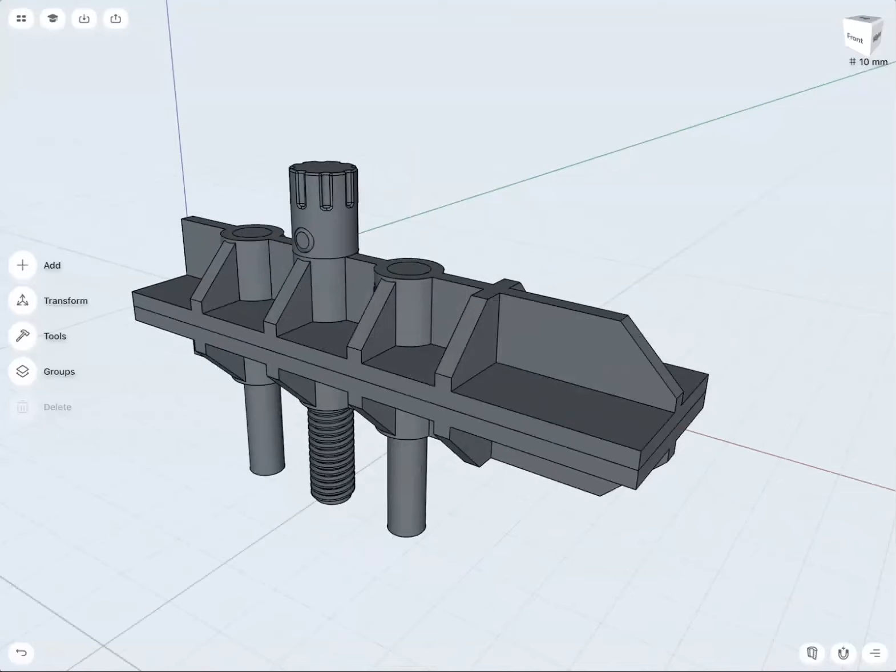Hello, everybody. In today's episode, I will show you how we can use Shapr3D and the sketching and modeling tools to create your own custom 3D printed model making clamp. As Anna mentioned, I'm an industrial designer, and as industrial designer, we have to make a lot of models. Sometimes for a wood shop or model making shop, now with 3D printing, we can create our own tools, which is really great.

What I will show you today is how we can structure our design into all these individual parts, how we create all the individual sketches and why I create them in a particular order. After modeling the part, I will show you how we can structure everything for 3D printing, so when we bring it to Cura or your other favorite 3D printing software, you can easily and efficiently print your own parts.

So with that said, let's start with a new scene. One of my first steps is to go to the view cube, upper right corner, tap it, go to units. I work in millimeters and decimal for degrees. We can go to views and select top view.

Before I continue, let's go to the bottom part where you see the magnet icon, bottom right, select it. I would like to have snapping sketch to grid and auto constraint turned on. Working with the grid is very useful to make sure that everything is perfectly lined up, and I can position and align all my parts very easily.

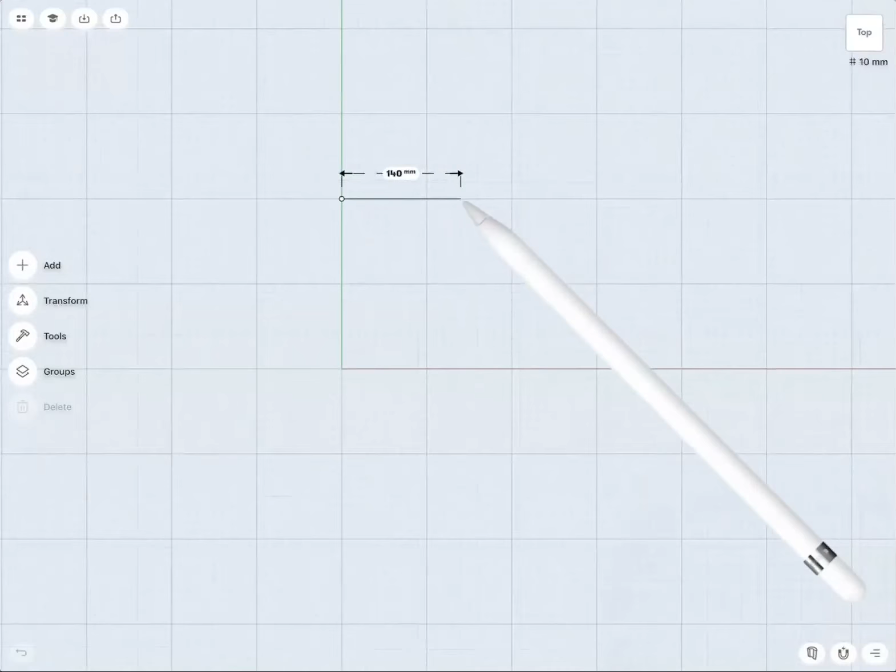We can zoom out a little bit with pinching our fingers. The wood clamp is 40 millimeters deep and 140 millimeters wide. So with the pencil, I start drawing a line. I can see already I zoomed out a little bit too much. Not a big deal, I can zoom in a little bit, select the point, and bring this one down.

The whole clamp is 40 millimeters deep, so with the pencil on the right side, I draw a line 40 millimeters. With the auto constraint turned on, I have all these constraints automatically added to me, which is a really great helper so I don't have to do this by hand. I can also draw another line horizontal to there.

Before I continue, let's add some dimensions. With the pencil, I select the line, then I select with the pencil the number and simply click OK. That specifies this line to be 140 millimeters. I will do the same with the vertical line.

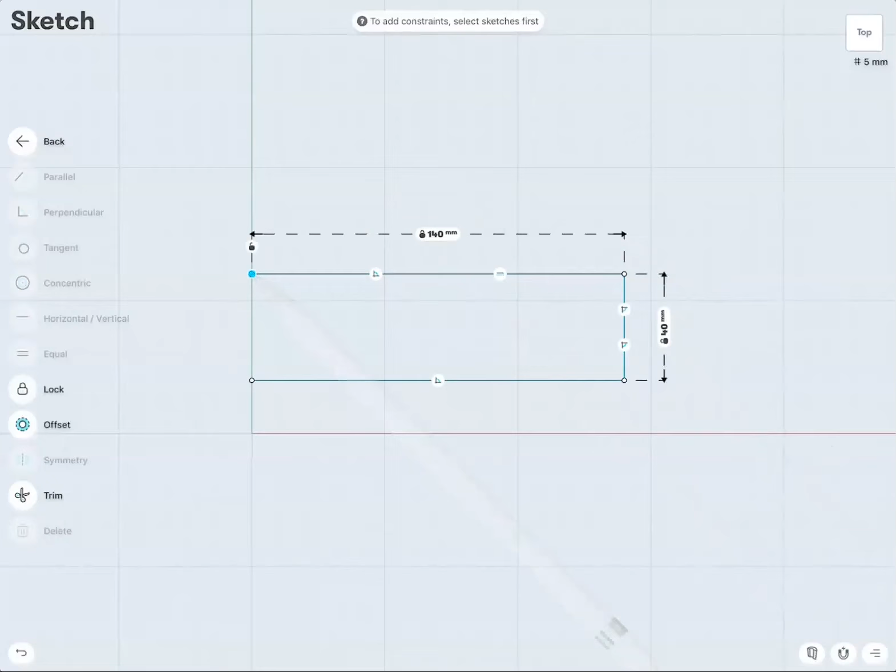Now to work easier, I have to position and center the sketch on my grid. To do this, there's a very simple step. I select one point and move this one down, a little bit to there. I moved it on purpose a little bit lower. On the right side, I have just one line with 40 millimeters.

Check out what I'm doing now. I draw one line vertical and another line vertical. Now I have two lines. This point, which I have selected, is already at the center, the connection of y and x. That's the 0 point, and I want this point to remain there forever.

So with the pencil, I select the lock icon. When you do this, that point becomes pure black. If I select it, I can't move it anymore. So this point doesn't move.

Now I can select one edge, doesn't matter which one, select the distance and say 20, and this one automatically is 20. I don't have to add that dimension there, but this way, very easily, I have actually created the base square and positioned it correctly.

For the wood clamp or the model clamp to be structurally more secure, I need to add some support, and that is what I will do in the next step.

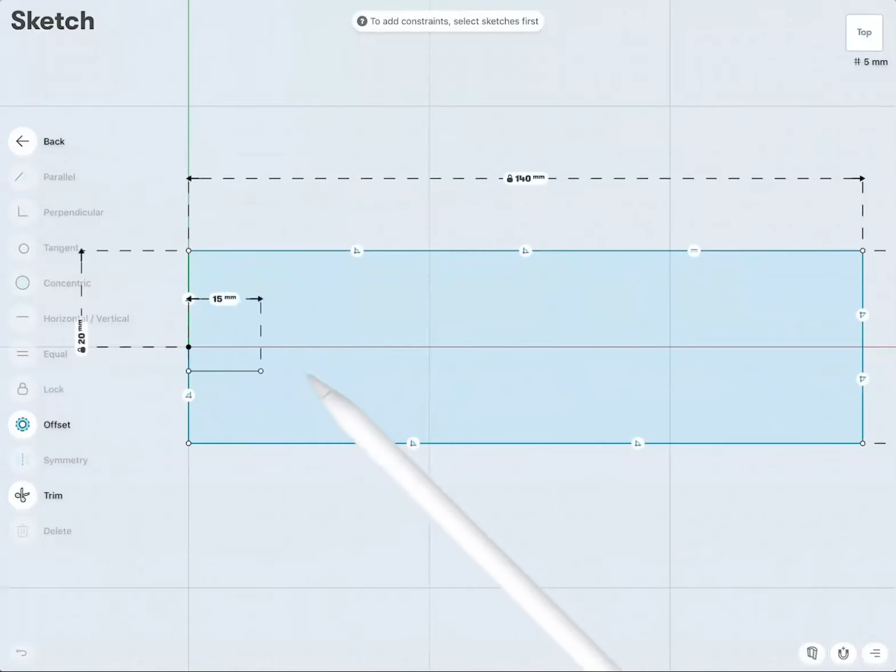So I will do the same here, one line and another line, left to right. This line I will select to make sure this is horizontal. And on the left side here, I select this one and maybe say 2.5 millimeters, because I want 5 millimeters to be the material thickness.

But if you also work with millimeters and 3D printing, working with 0.5 millimeter is not necessarily always necessary, so maybe it's also easier to just break it down to even millimeters. On the right side, I will select these 2 points and specify this to be 4 millimeters. And you see automatically the lower line, this one was moved up. Great.

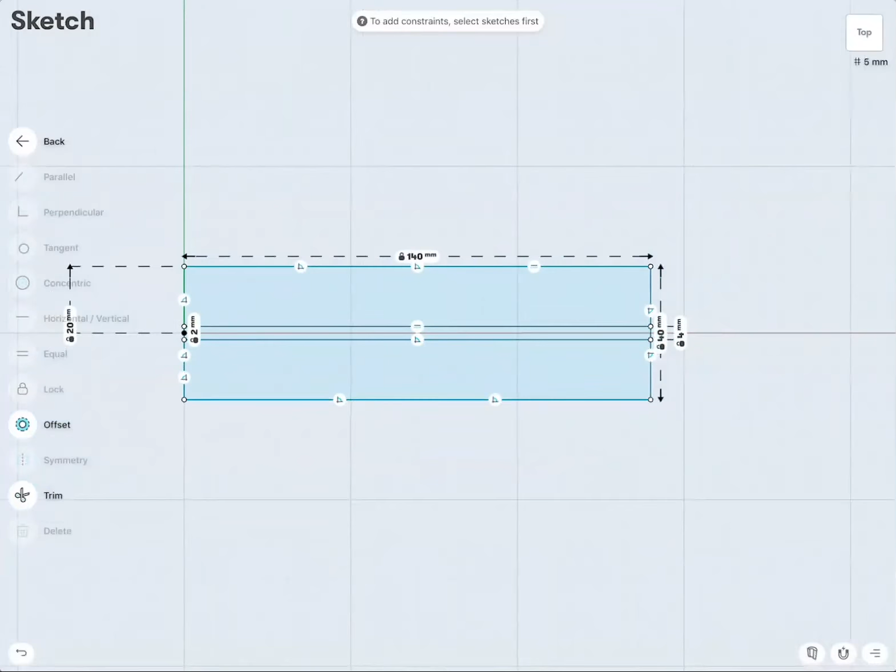So this surface, which I just created, later will be the vertical support extrusion. For the clamp to open and close, I need to have 1, ideally 2, 3 is best, support axes - 1 axis with the threading and 2 axes to glide along. And also these cylinders, which later we will create, I want to have some support structure.

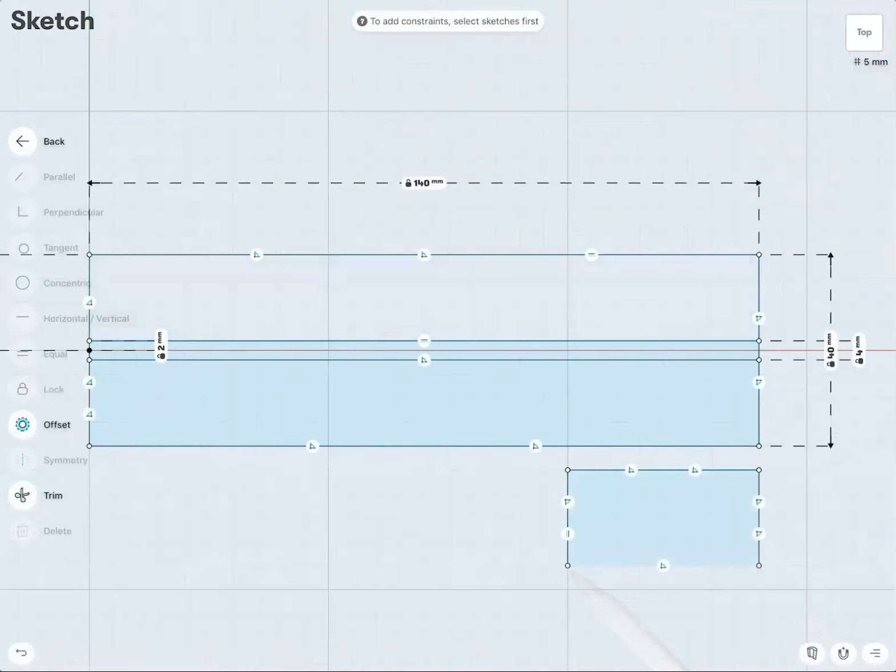So working with the grid again is very useful. Let's draw a rectangle here - this is just a visual guide. This helps me identify where roughly I would like the model part to be, and then I will work with the grid.

For example, here at the center, here at the center, and here at the center, I draw lines. The reason why I drew these 3 lines is it helps me plan out where I would like to position the cylinders. With the pencil, I start drawing and make a circle, and just reposition it. See, again, I use the grid for everything.

The radius should be 10 there and there. Okay, good. So that's roughly how much space actually later everything will occupy.

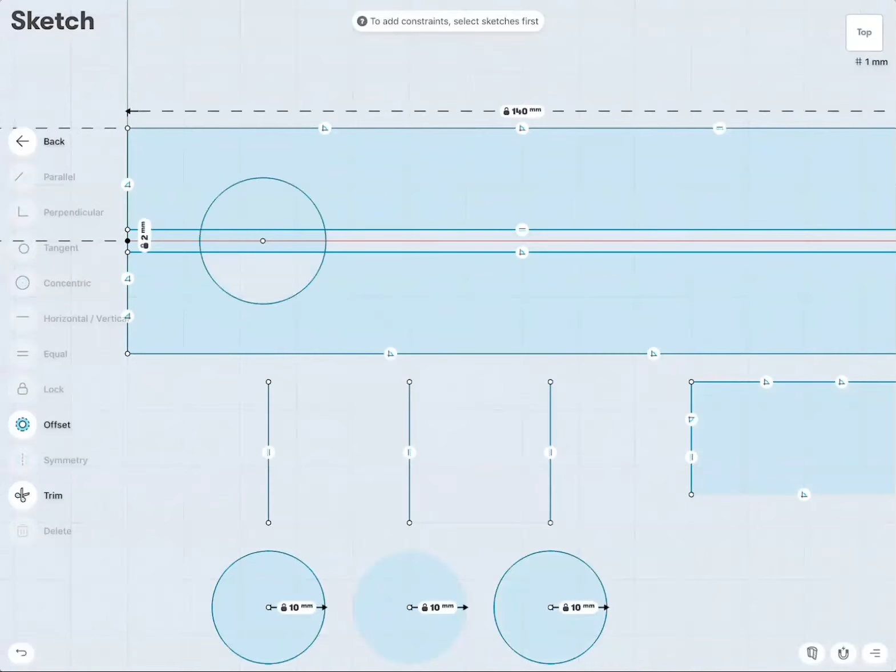This might look a little bit complicated at the beginning. You might ask yourself, why do I draw the cylinders down here and not up here? The main reason is I make everything a little bit easier to structure by not loading my sketch too much. The cylinders I have here later, I will create actually in a different view for a Revolve object. This will all make a little bit more sense when we progress.

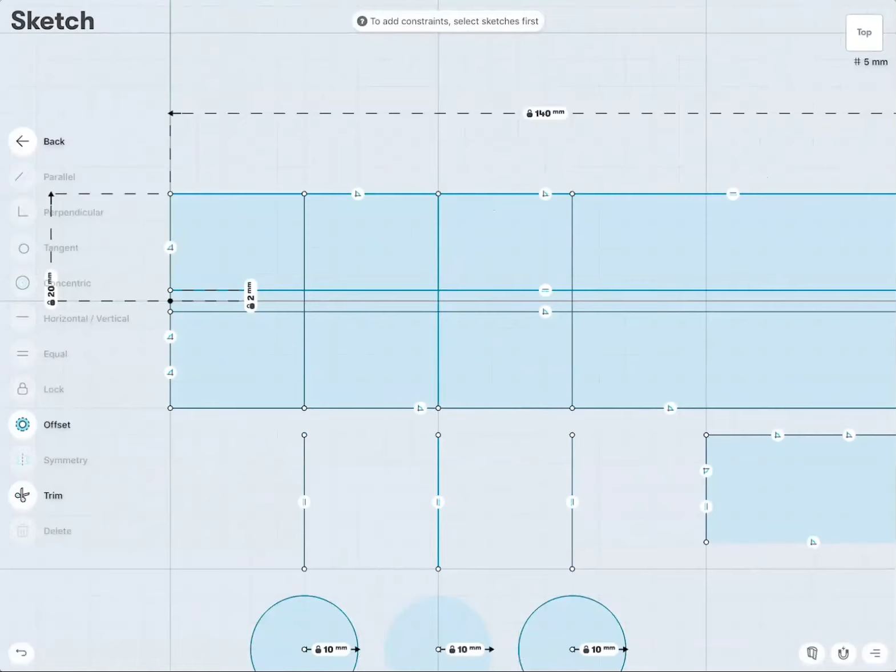With these lines drawn, I already know that roughly here is the center of the 3 other support areas I would like to extrude up. And from each of these lines to the left and to the right, I would like to have another line with 2 millimeters. So we can zoom in a little bit, draw a line.

And you see this is 4 millimeters, so I have to move this one a little bit to the right. And then I draw another line here. I draw a line there - this is 1 millimeter over. Let's make this vertical.

So when you move a point and the line starts to rotate, we need to add a vertical constraint if you do not want that line to rotate. And there's the last one.

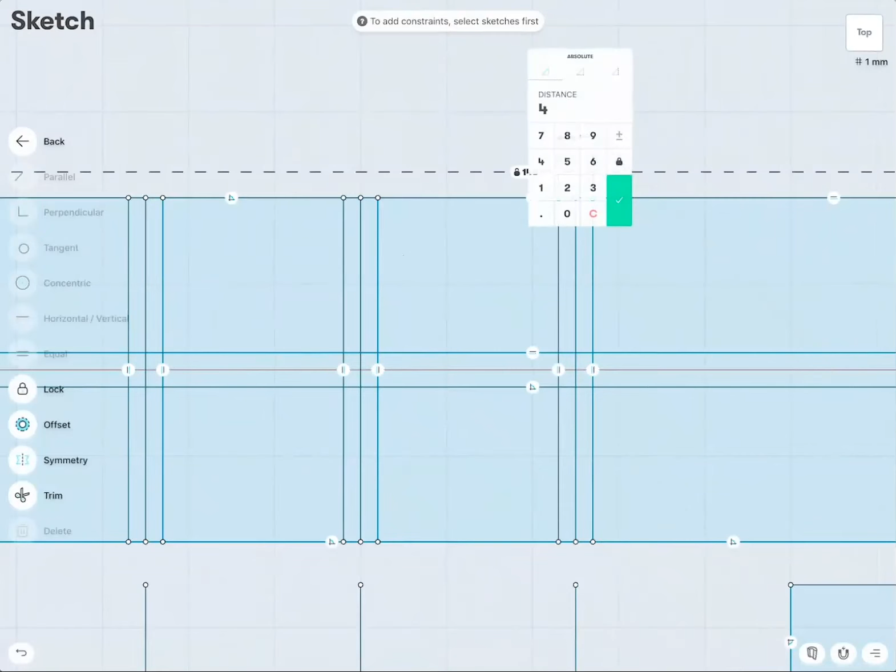So if we select these 2 points, we could specify everything of being 4 millimeters. There, and the last one.

These 3 center lines which I have there were more of a helper, so now I can select them and remove them. All this here I will remove too - these were more some helping elements. There, deselect this one and delete. Good, good.

Okay, so at this point, when it comes to the top view, we have most of our stuff already created, and we can go ahead to extrude everything up. I would like the clamp to be lightweight and very easy to use, and not having any sharp corners.

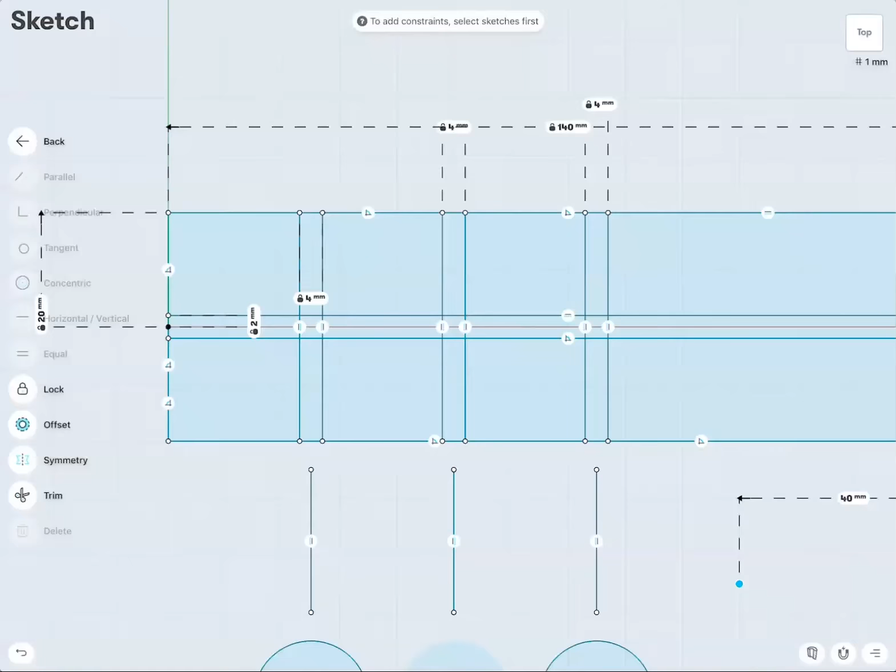So I can select all these faces, and then with the pencil, push up and extrude this one to 4 millimeters material thickness. Then in the second step, I select all these other faces, and with the pencil, move upwards and extrude this one to 20 millimeters height.

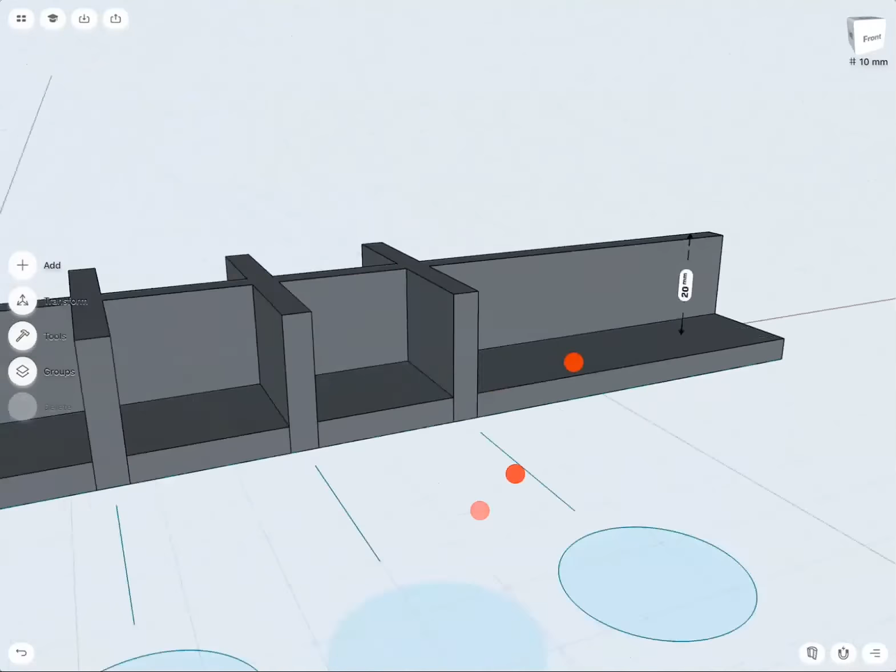So everything has now 4 millimeter material thickness. These are all individual elements, as you can see - if you double click on a face, these are not joined together.

So let's join those. To do this, let's go to Tools, then Union, select all the elements with the pencil, and select Done. If we rotate now, there you see these are unified solid faces now - these are not individual elements anymore. Great.

Also here, the circle we can remove - we don't need this necessarily anymore. So sometimes I also clean up my drawings and only have inside the sketch what I really need.

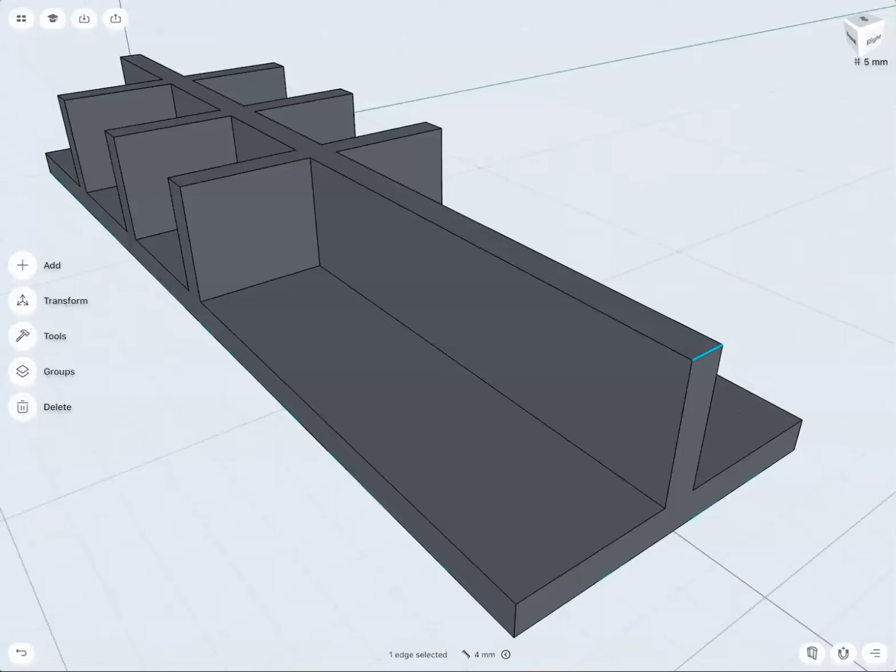If we rotate this around a little bit, this looks a little bit sharp, so let's chamfer actually all these edges. To do this, I will select this edge, swipe left or right to go into fillet or chamfer mode, and I can specify the distance 12 millimeters.

Now I will repeat this with all these other edges. So be careful that you just select only the edges and do not click on the face, like what I did one time, because then you select all the edges.

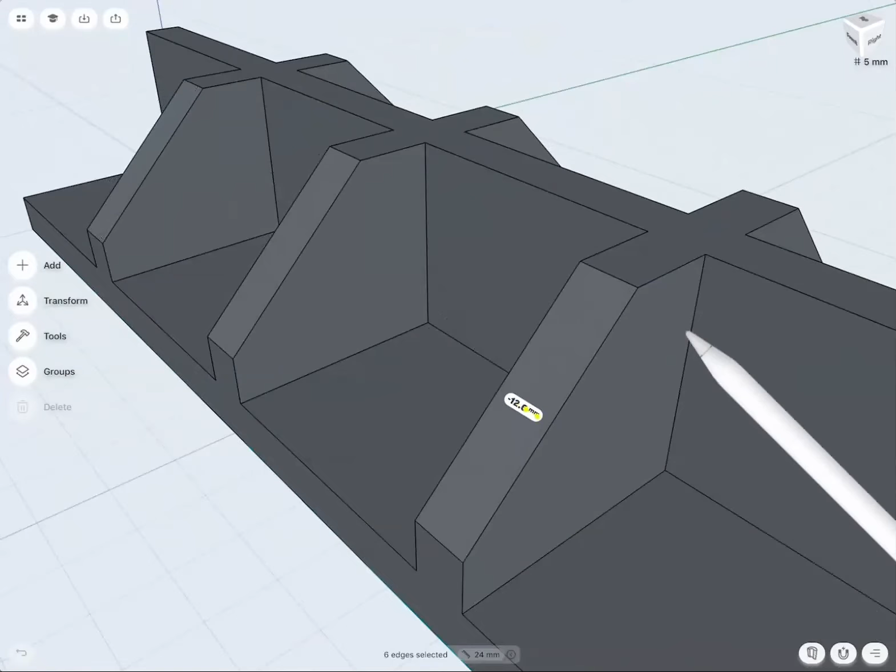With these 6 edges selected, I can now with the pencil swipe so I get into the chamfer mode, and 12 millimeters. Okay, so you see this already feels lighter. Structurally it has the same integrity, and we have removed all the sharp edges, which could make this tool a little bit difficult to work with.

So before I continue, let's go to groups, swipe to the left, rename, and let's call this one top. I click plus, make a new group, swipe, rename - I call this one bottom. How you give these groups names is really up to you; you can develop your own syntax.

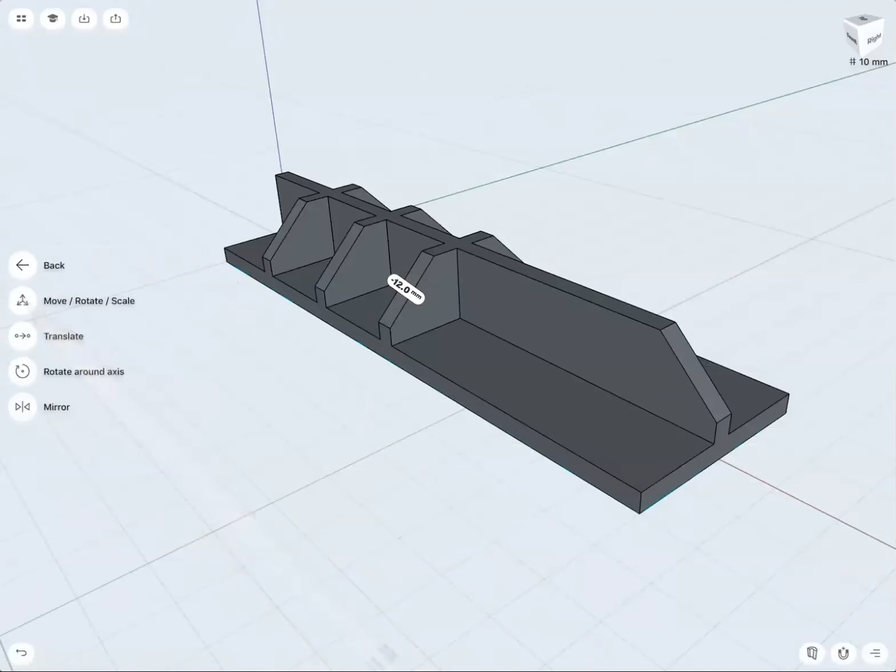And I would like to make a copy of this part and then flip it down. To do this, I have bottom activated. Then I will go to transform, mirror, double tap on the face to select the complete body, tap next, and then I select the bottom face. And I want to have copy turned on. And you see with copy turned on, it leaves the original part and makes a mirrored copy. Tap done.

And we have to move this one to the bottom part. So with bottom selected, select the move to group icon, select the object, select done. And there we are. For the moment, we can actually hide this one. We don't need it. Good.

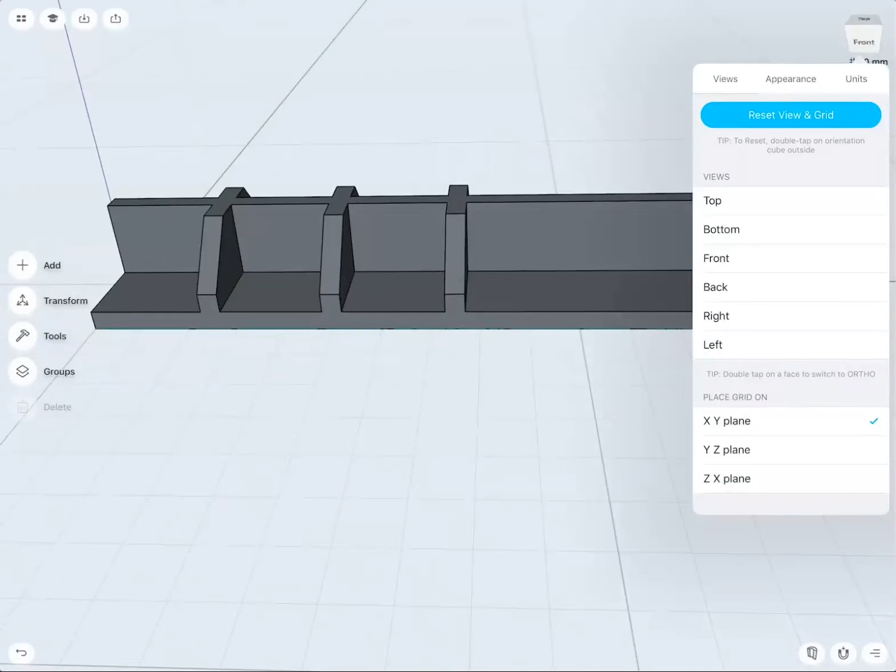With this part done, we can actually now switch to working on the axes and the cylinders and the threading. And for this, we will go to the front view. So I will go to the view cube and then select front. I will not, for example, tap a face, because while I go to a side view, you see this will move me onto a grid that is aligned with this face, and that's not centered on this face, which is why it's very important that if you want to work symmetrically, you use the views from the view cube.

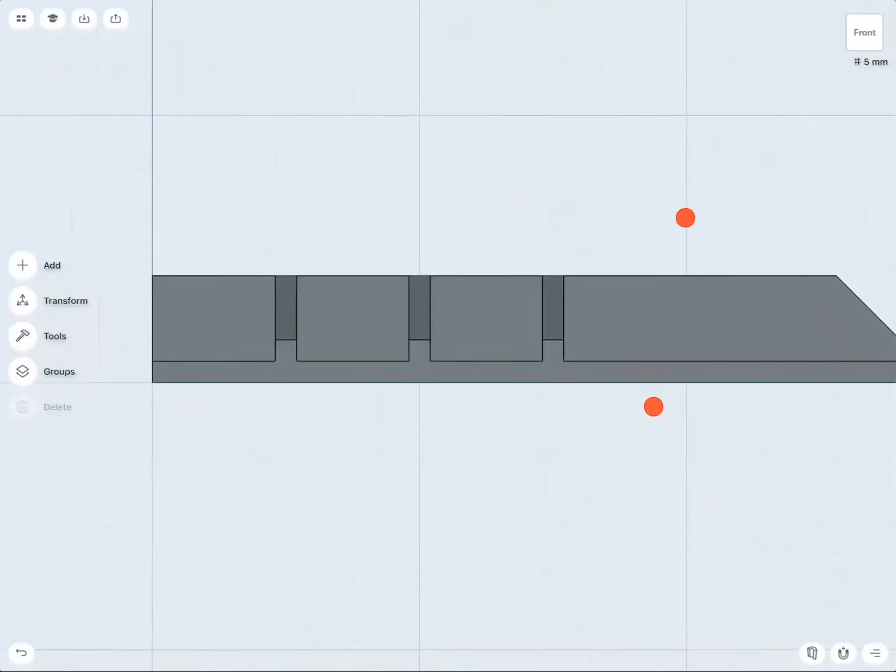If I rotate the view now, you see this is perfectly centered. Good. Let's go to the side and zoom in a little bit. And again, because I work with the grid, I zoom out just a little bit till here. Now I can draw myself again just some guidelines. And these guidelines are perfectly centered on each of these three faces, which means now I can turn even the bodies off, go to groups.

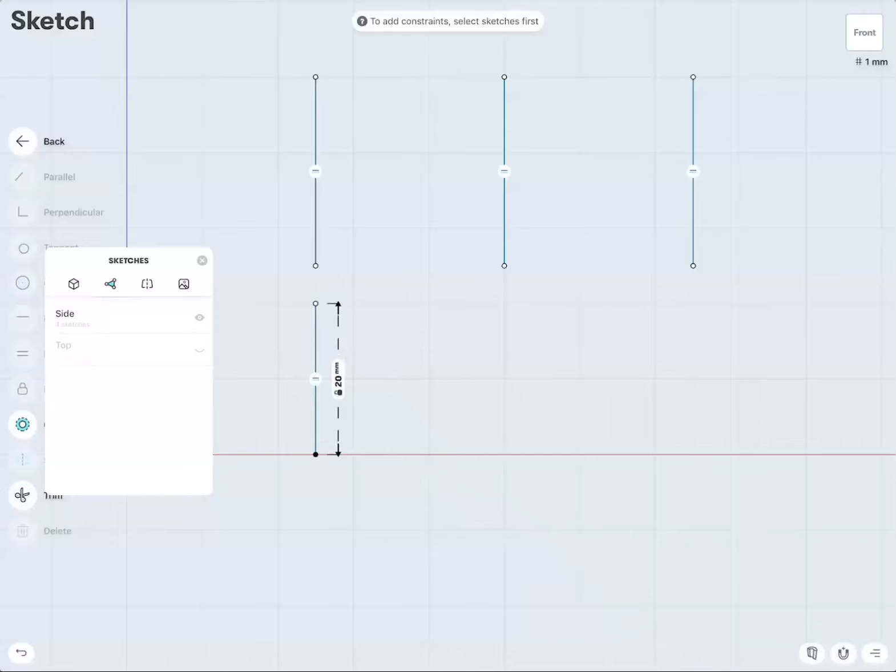Let's call this group top, and this group I will call side. I also turn off the top group, so I do not mess with it. And I will draw a line below there, select the lower point and lock it. This line is also vertical. And now select a line and add 20 millimeters, because this, you will see, is exactly the height.

I will do the same here. Lock it and 20. And here. Again, this is a perfect example why working with the grid is so useful. And once that is done, we can select these three lines and delete them.

So let's assume you do first a prototype 3D print. That means your axes are made out of plastic and not steel. And 3D printed parts are a little bit less stable. They can bend a little bit more than, for example, steel rod or steel threading you can buy at every hardware store. That means we, for 3D printing purposes, have to make support structures like cylinders a little bit thicker.

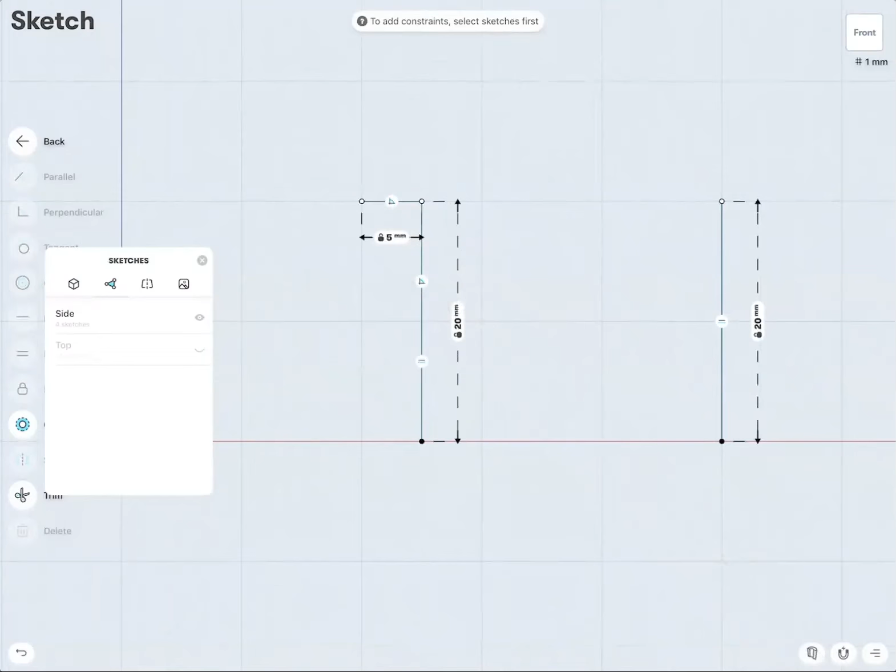These lines are the revolve axes. And I will create the profiles to revolve around consistently on the left side. And I would like each axis to be 1 centimeter thick. So I will draw from the top one line, make this 5 millimeters. Then I draw a line down and a line to the right. And this line I will make horizontal. So this is, for example, half of the rod thickness.

And the rod has to slide inside a cylinder. And I will decide 3 millimeters for the material thickness. So I will do exactly the same, but just with 3 millimeters material thickness. Add the constraints, and there we're good. And we can continue this with all.

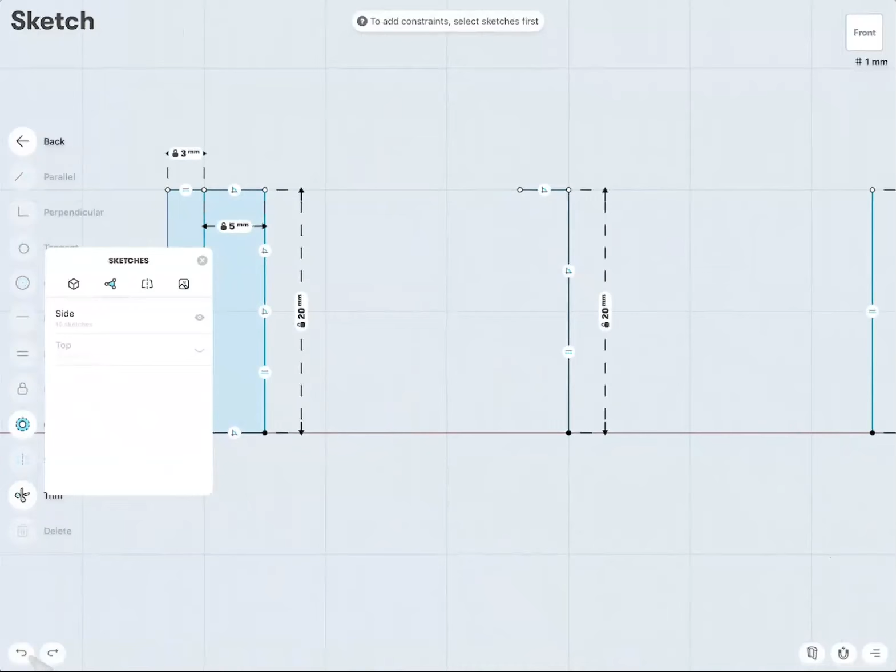If I already know 5 and 3, I could maybe draw the first line, instead of being 5, already 8, and then draw a line in between. But out of personal preference, I always like to rather draw individual elements. So if I have to modify them, it's a little bit easier to manage. And the missing constraints. There we are. And let's do the same here. So you see, this is pretty quick to do.

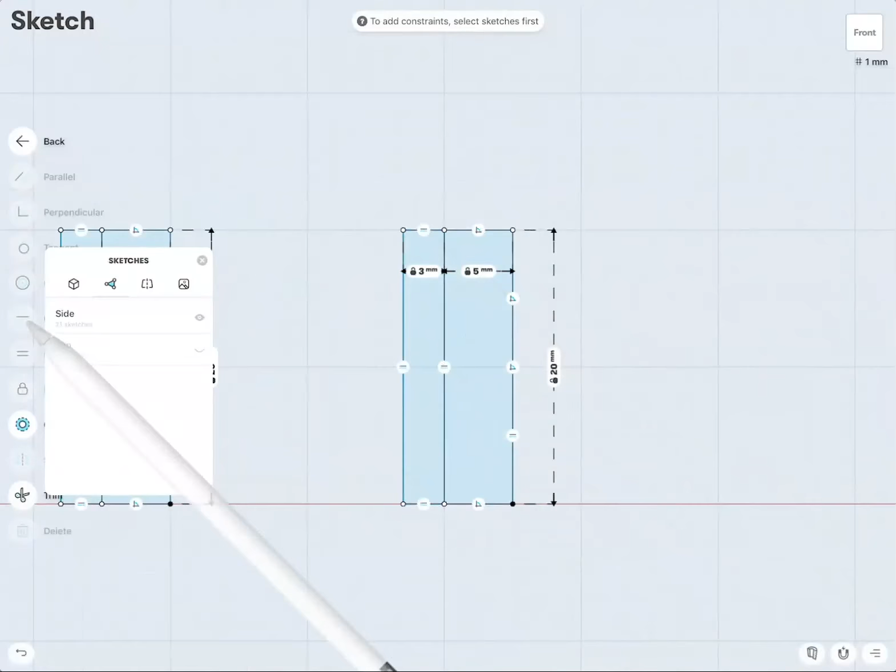Also, as a small tip, if you want to build a tool, try to go to a hardware store or somewhere and take measurements. It really helps getting a feeling for how thick something has to be, how wide, how long. Because nothing is more frustrating than when you create everything and then later it doesn't really work because you overlooked something.

If I go to the groups again and show the top, all the parts I built are from the bottom till the top part. But I also need to have an extension to the bottom. And by my measurements, I figured out 50 millimeters for me is actually a good distance. So 50 millimeters. Then I draw another line, connect these, specify those to be horizontal and vertical.

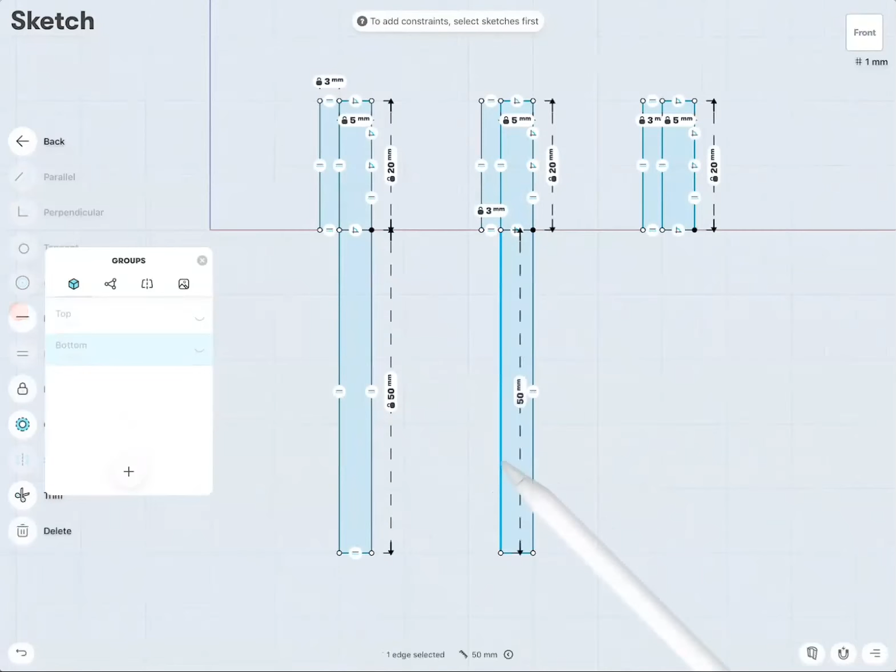I skip actually adding the 50 millimeter in the last two. I could do it, but because I work with the grid and the far left one is 50 millimeters, I know that these all are 50 millimeters. Good. So we have the left support, the right support, and then the center. That's going to be the axis which will have the threading.

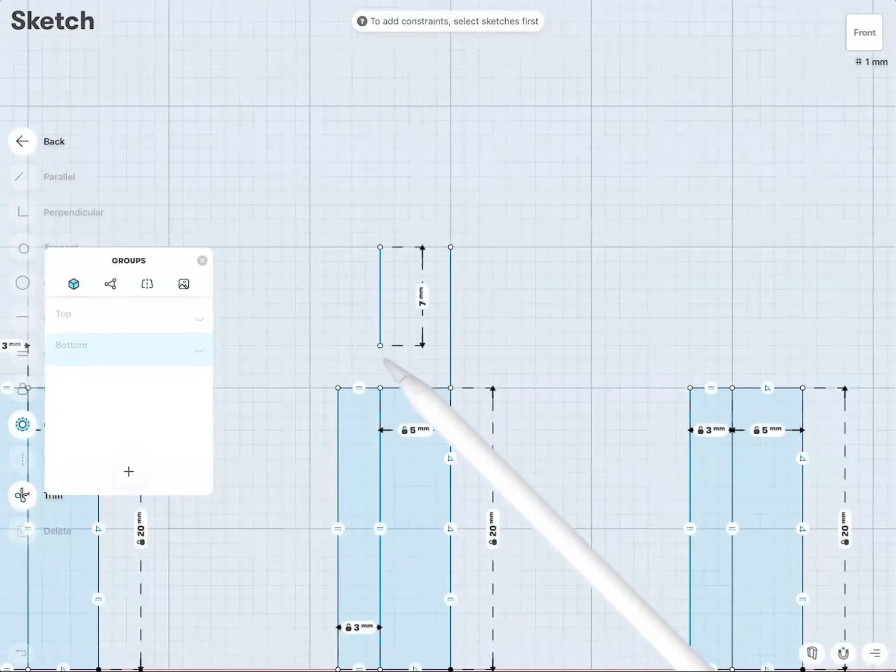And for the top, we also need to have a little bit of some sort of a grip. And the dimensions there again are up to you to decide what feels comfortable. How big do you want to make it? How small do you want to make it? So I decided to start maybe with 7 millimeters to try out. And then I draw another line there to there and another line there to there.

And what I did in this case is, you see here, I have 3 faces that later will revolve together, just be the rod. And this will be the cap. And again, that will be the cylinder that will support the part. Good. So having talked about the revolve, let's do that. I will make a new group. Call this axis. It is selected.

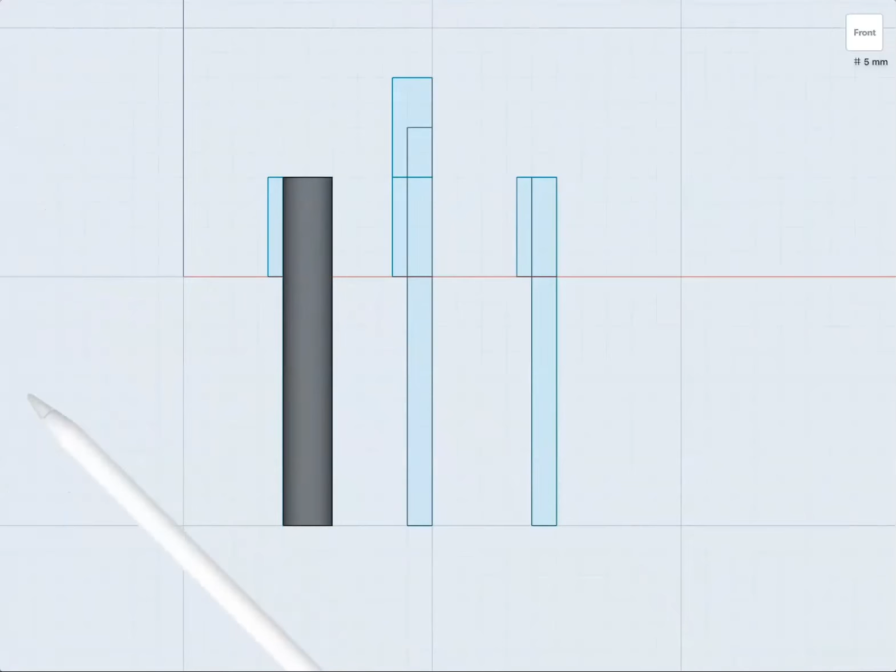Go to Tools, go to Revolve, and select these 2 faces. Next, select that edge. Go to Tools again, and Revolve. Select these 2. Select the axis. You see how that works? Pretty good. And unfortunately now, I realized I can't really see the sketch anymore. So I click Cancel for the moment.

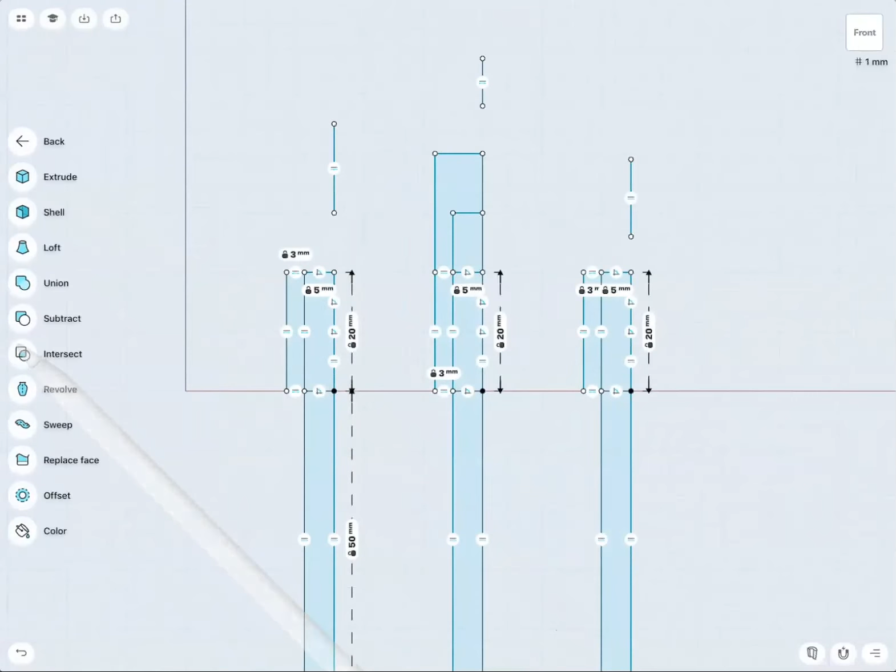And I could go to Groups and hide it. Alternatively, for this task, I can also put down a small helper line, again, using the grid to make all this a little bit easier to select. So revolve this one along this one, and Tools, revolve this along that line. Tools, revolve these 2 along this line, and 2 more times this along there, and this face, the cap, along this line.

Great. And in case I need to do something again for that purpose, I just leave these 3 lines which I drew there. With these lines done now, I could go to top and add these 3 first cylinders that actually will hold the axis to that part. But I also need to add these to the bottom part.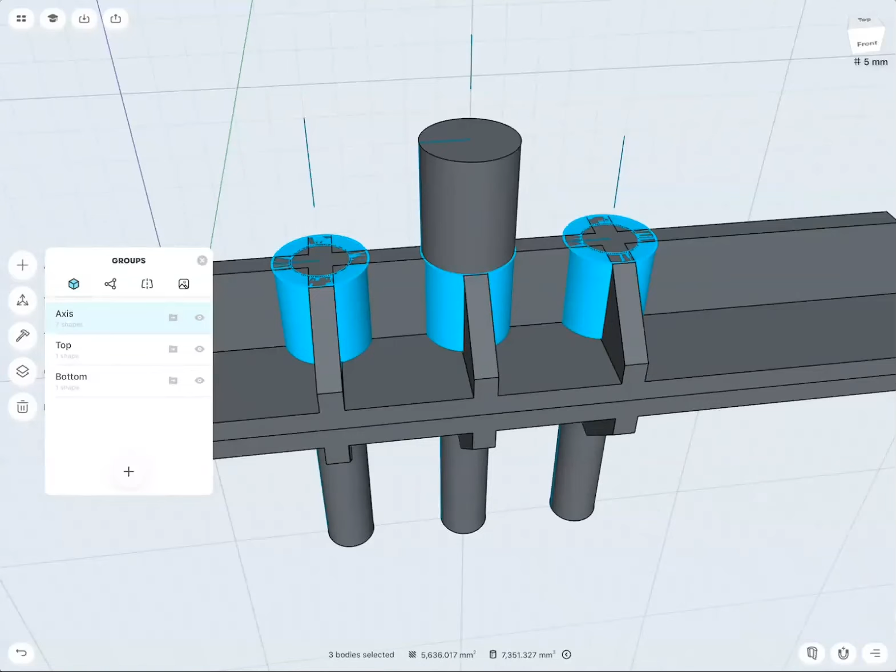So there are now 2 ways how to do this. Either I make 3 copies of those and then mirror them down to the bottom group, or I simply continue working on the top part and then delete the bottom part and just mirror again the top part. And maybe that is what I do. This will be a little bit easier. There are always many ways how you could do something. So try always to also establish a workflow that is as productive and easy as possible.

And via the union command, we join all these parts together. Select Done. And those 3, sorry, this one I will select and delete, because we will remove it later. And it can happen, as you can see, based on how you join parts, that an object might move. So go to top and add this body to the top group, so I can hide this.

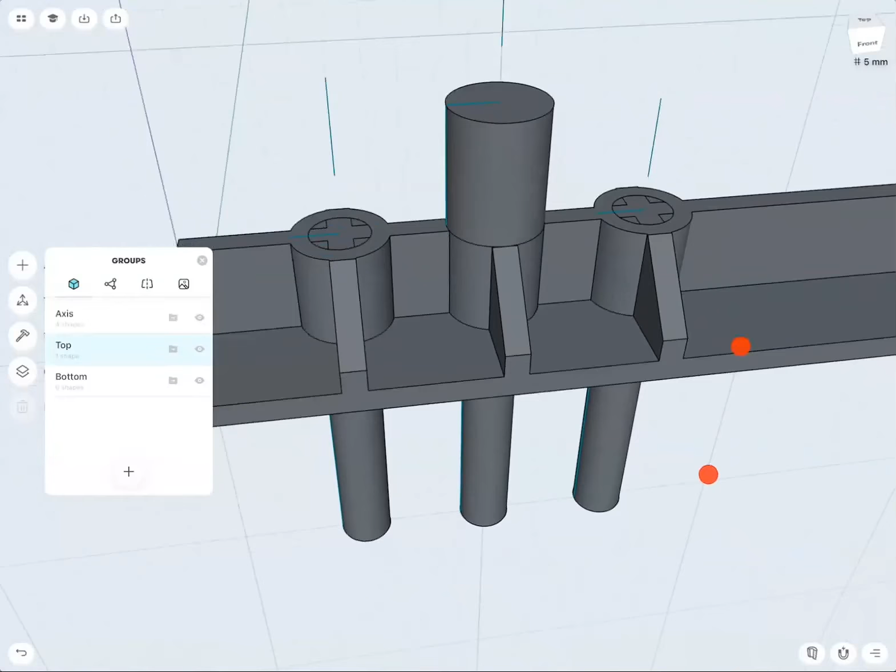And you see that we have all that other geometry still there, and there's no cut done through it. So we have to do the cut now. Let's show the axis. And currently, when you go to union or subtract, you will see that the tool we use to cut out the holes will disappear. So to prevent those to go away, I will simply make myself a copy.

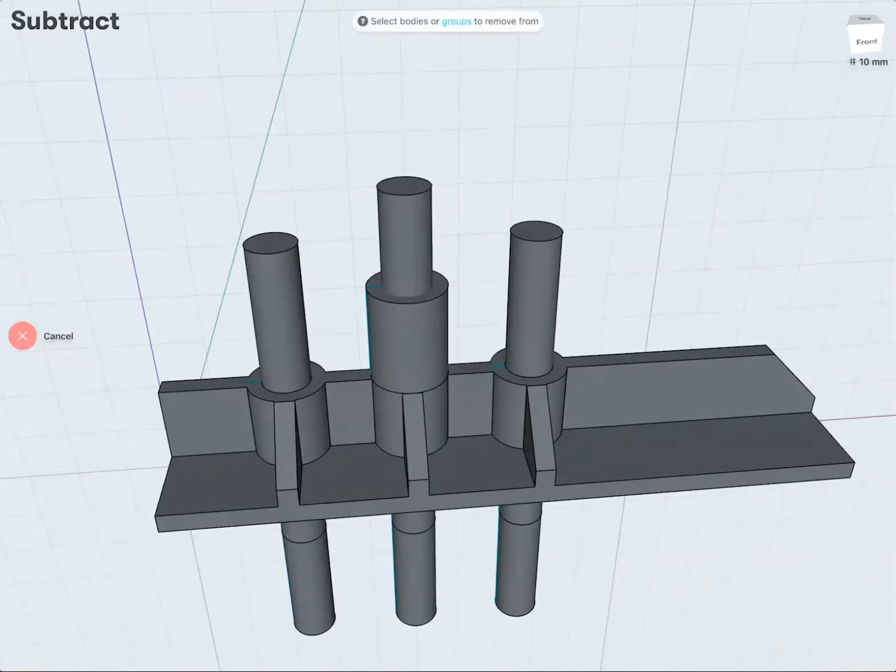With those three selected, I go to transform, move, and copy. They're nice and long, so I move them up to there. So they're very easy to select now. So check this out. The top group is selected, then I go to tools, to subtract, select the top part, next, and then I select these three cylinders, select done, and there we are. Perfect. So this is pretty good.

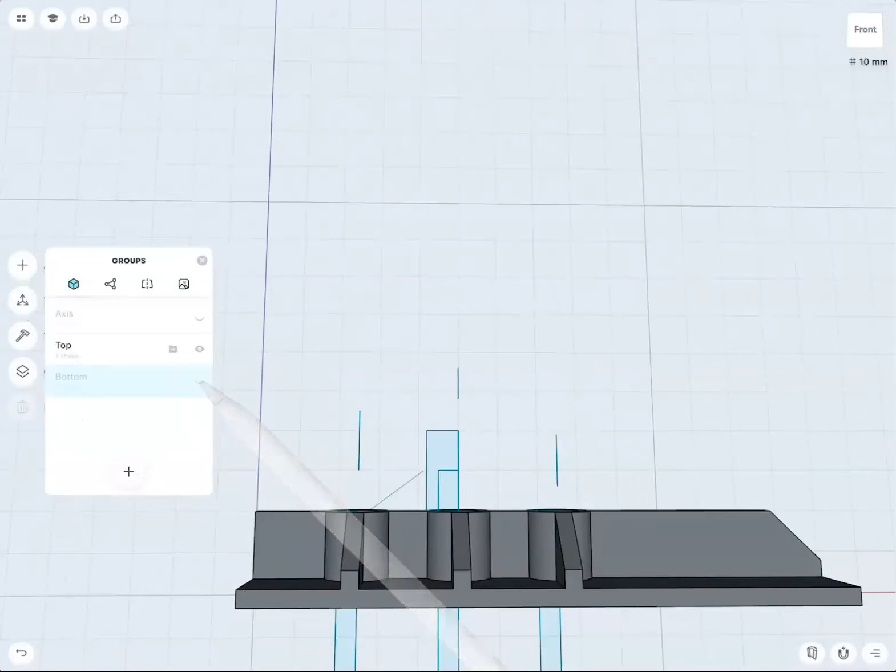And this is, besides one minor detail, nearly the same as the bottom part. So now with the mirror command, I can easily make myself another copy, the same way how we did before. And then add this one to the bottom. And let's hide it. Good. We're making very good progress. Let's take a look what we have. We have the axis, we have the top and bottom part, we have also a placeholder for the grip.

The question now is, how do we make sure that the left and right cylinders always stay in place? And when I rotate this one, how do I make sure that the cylinder below only rotates and then moves the lower part up and down? So it's a little bit of mechanical tinkering and deciding how you would like to do that.

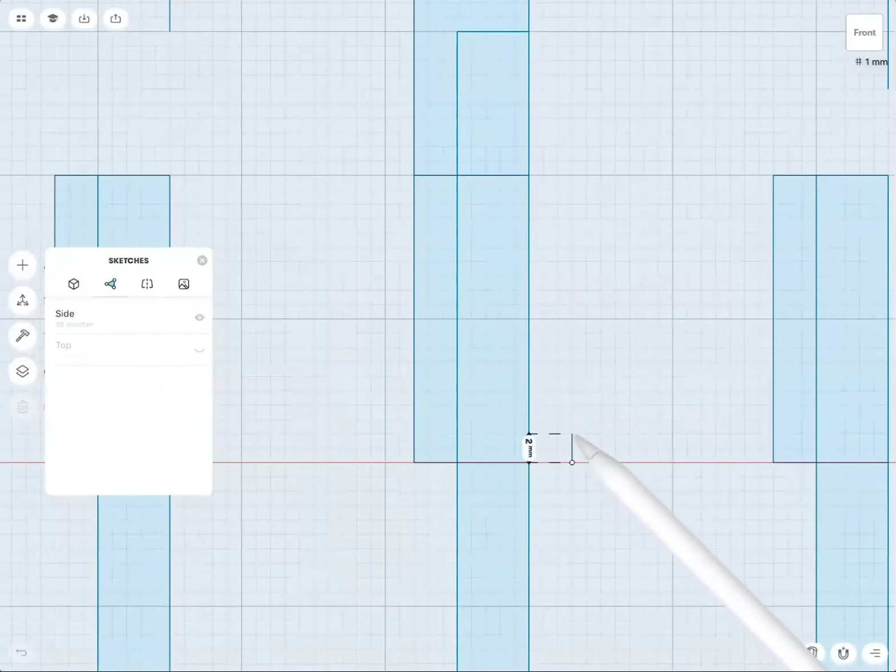The process I will use in this case is the following. I will go activate the axis group again, go to sketches, then I zoom in a little bit, and I'm just drawing a line for size reference, 2 millimeters. That's actually the material thickness of the bottom plate.

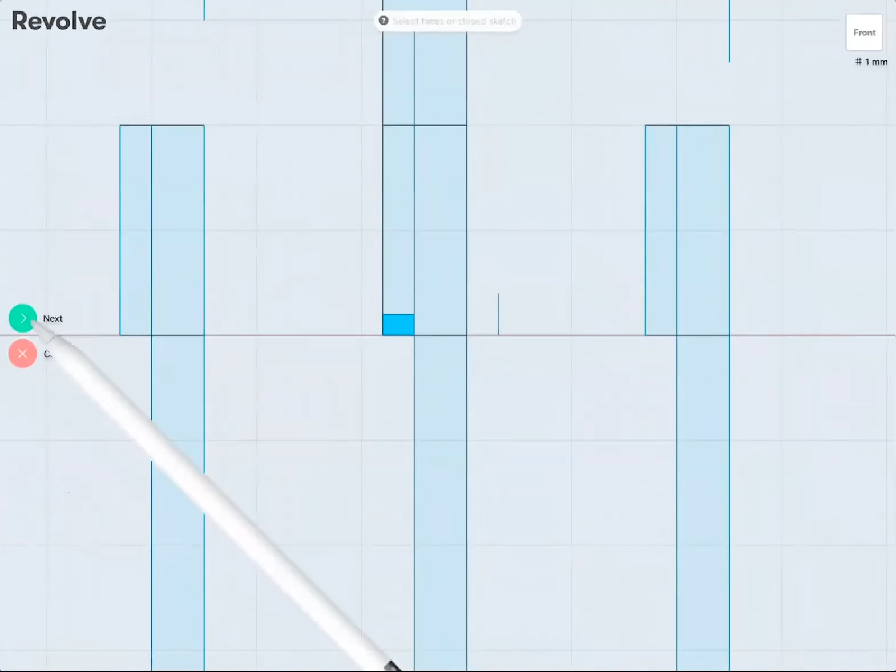And when I create a line here and make this one 2 millimeters, this also has 2 millimeters height there, and this has like 3 millimeters width. This face I can now revolve. So I will do this along this axis, and there I have it.

This revolved object I will now cut out of the bottom part. To do this, go to tools, subtract this one minus that new element. There it is cut out. Very good. And one more time, we have to move this one back. And I have to recreate this revolve object one more time. And then join these two together.

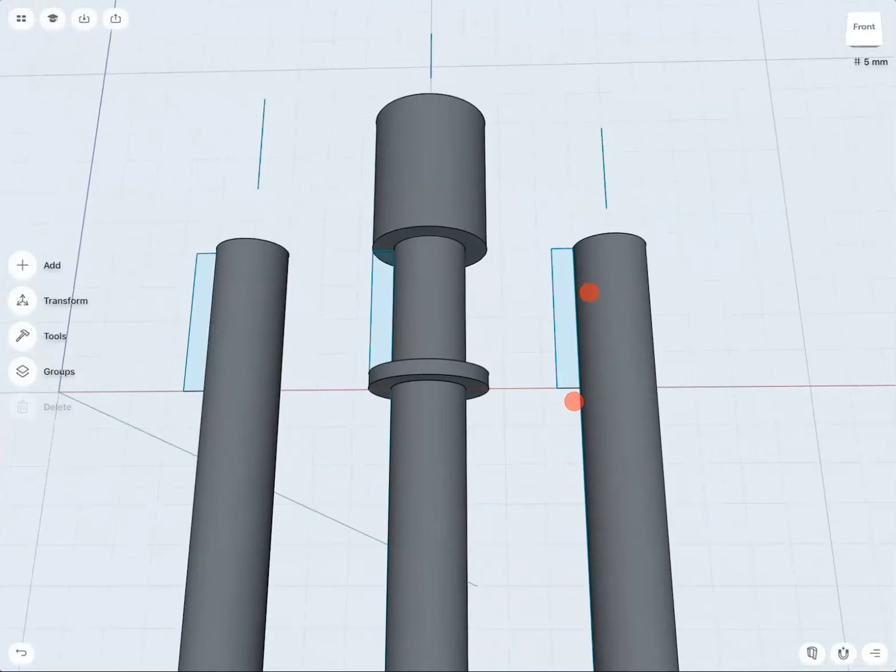So the reason why I did this is, as you can see now, that this one can slide up and down, but once it is there, it cannot go further in because the rest of the top part will actually press against the ring we just added to it. So it's a very basic mechanical idea we're using here. Good.

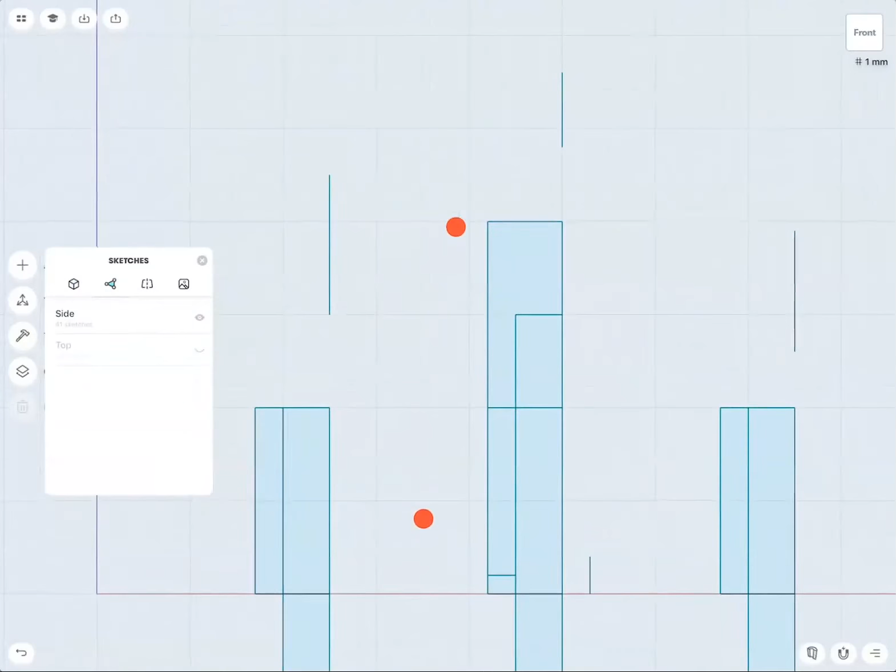The pins, the axes left and right, and the handle currently can still move up and down. And we need to find a way how we could support them. I might actually create a new group. This one I will call pins. Then I will go to the side sketch again and zoom in a little bit and create a small ring.

This one can be 3 millimeters, so it should be nice and big, that it is strong. It should not be too big. I need a little bit of material to the left and the right. So 3 millimeters looks actually very sufficient. I will do exactly the same here, there, and the same also here on the right.

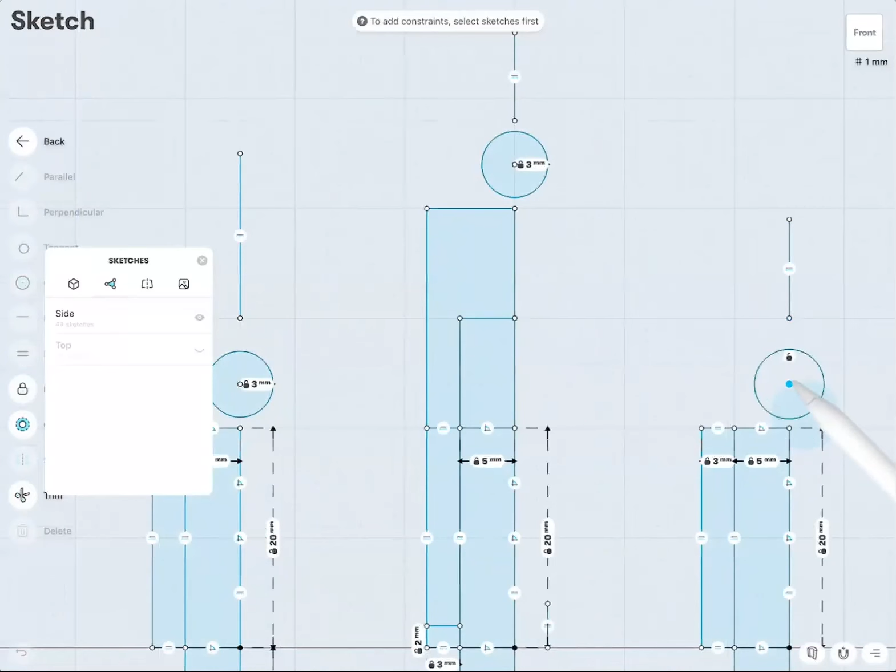This line is actually in my way, so I will move this one up and move this one to there. Very good. What I just did by using the grid, I tried both to be exactly at the same height. So when I move them down, it will be a little bit easier. Very good. I will continue with the center one first as an exercise. And I will turn on the top view and the axis too.

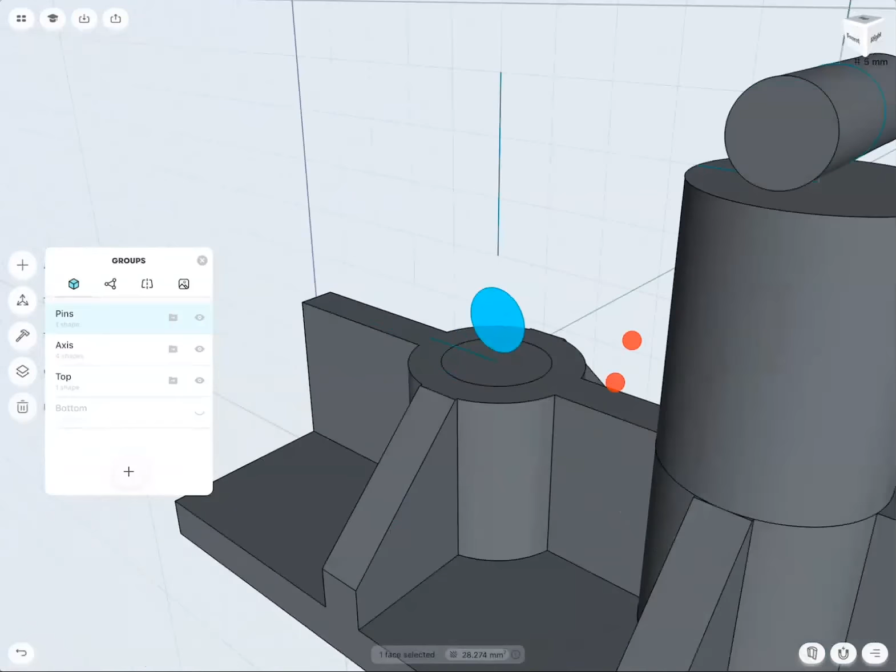And I can now, with this face selected, with the pencil, extrude this one out. And it looks like, in our model, 8 millimeters is what I need. Perfect. So one side and the other side, select the face and then move this one out, 8 millimeters. I will do then the same here and here. And on the back too. Very good.

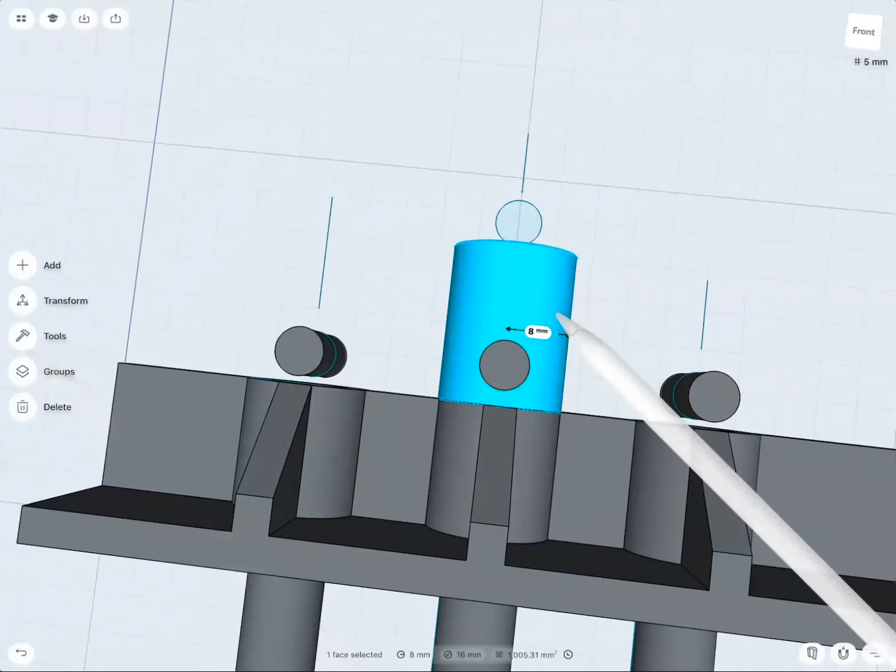Go to the move command, move, double click on a face, and we will have to move this one down. And I will move this one down pretty close. Again, I would like to have a little bit of space below, so don't put it down to there, a little bit up to here, not too high, because it has to cut both the grip and the cylinder that's inside.

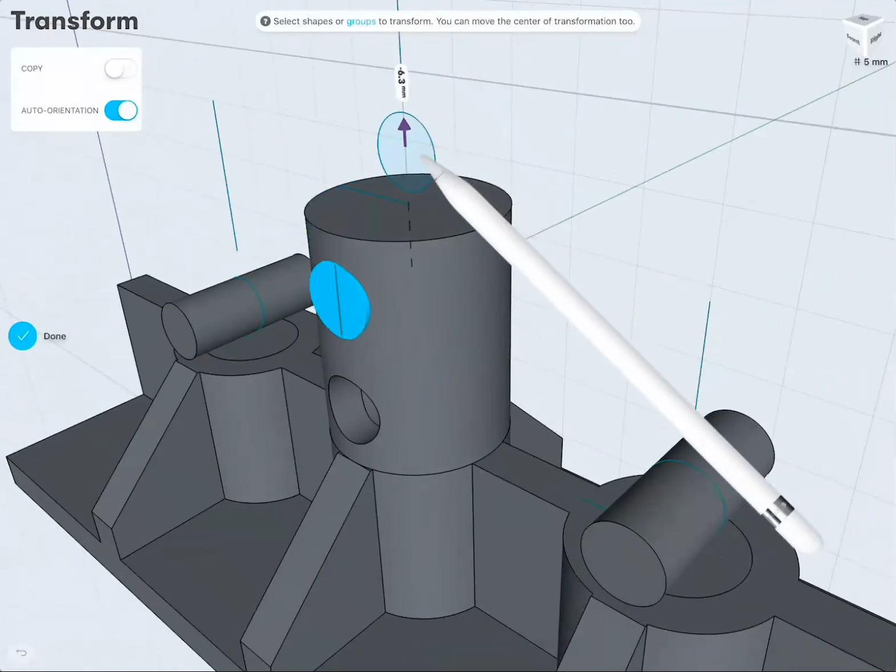I will go to the move command, go to copy and move this one up, maybe 16 millimeters, just memorize it. And what we can do now is go to tools, subtract, and say the grip and the axis, please subtract this shape from. And there we go. Now you see that's the reason why I created these pins. I move this one down 16 millimeters exactly. Or we can also use the grid for snapping. Everything is perfectly positioned. Awesome.

This is not going to be so easy with the pins left and right because they need to be a little bit rotated so I can cut openings into those faces. It will be a little bit difficult to do it through these faces. To do this, let's go to transform, rotate, double click, next, and we select this axis, select next, and type in 45 degrees. And one more time, and 45. In this case here, I want to make this even, minus 45.

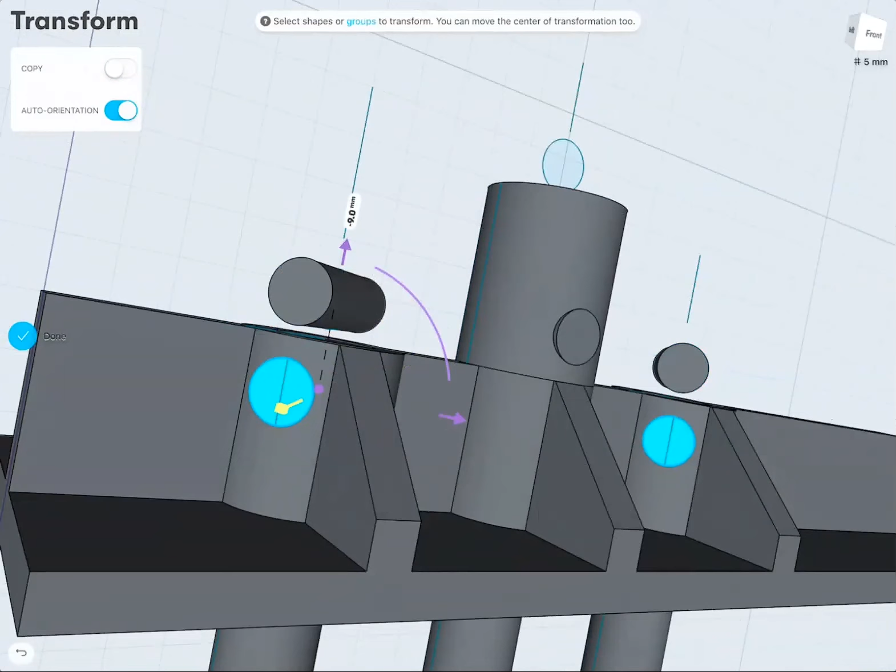And as I did with the center part, I will move those down as a copy. Let's say 10 millimeters, that's pretty good. I have sufficient amount of space on top. If I want to be more specific, so it's equal to the center one, I can move this one up 1 millimeter so that the distances there and there and there are the same.

So 9 millimeters. Then we go back to tools, subtract, select the top part and both cylinders. Next, select these two pins and select done. Everything is cut through. Now I can go to move and move these down exactly 9 millimeters. Everything got perfectly positioned. Good.

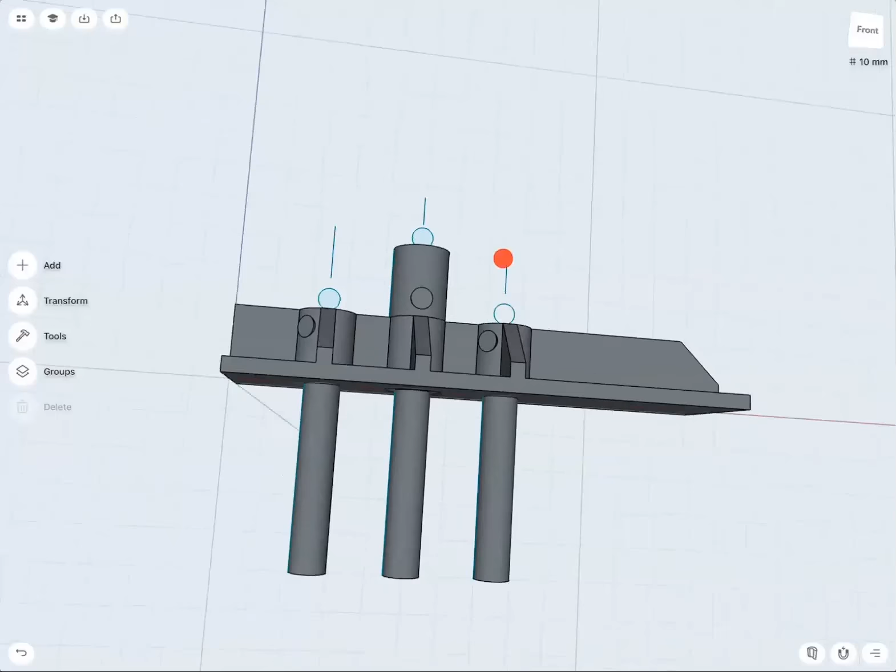Let's build the top grip, because currently it's very round. Feels nice on your hand. It's, however, not very easy to work with. So what we will do is go to groups and turn everything off besides the axis, so I don't see all the other stuff.

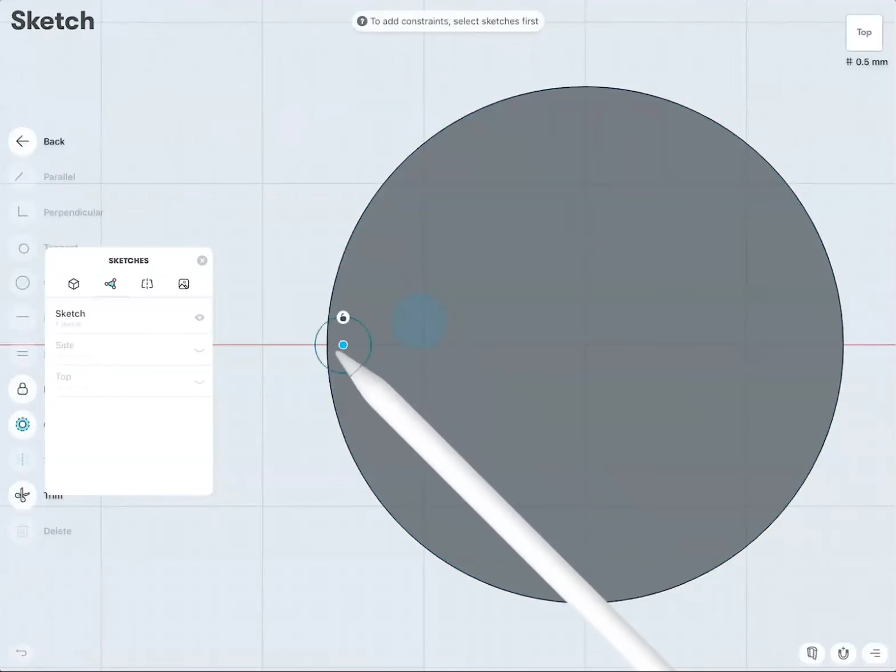Go to the sketches, turn everything off, select this face, double tap with a finger, and then I will create here a cylinder by creating first a circle, and then I move the circle onto this edge. And I will make this one 2 millimeters. Or 1.5. This is something for you to figure out what feels good.

If you have a too small cylinder or cut, then maybe the grip isn't strong enough. If it's too big, maybe you don't have enough grip. And it's also based on how big the circumference of this top part is. So it's a little bit of tinkering. I found 1.5, 2 millimeters is pretty good.

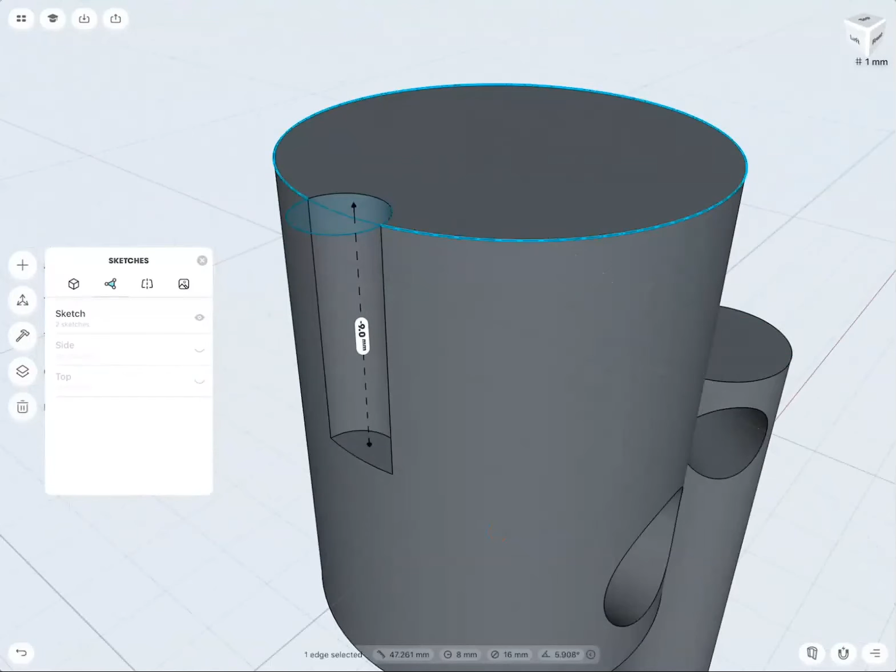With this done, let's with one finger rotate our view, select these two profiles, and then with the pencil, we start extruding right into it. I go down 8, 9 millimeters. Very good. And this opening, I would like to multiply or circular array around this profile. There's a very easy way to do this.

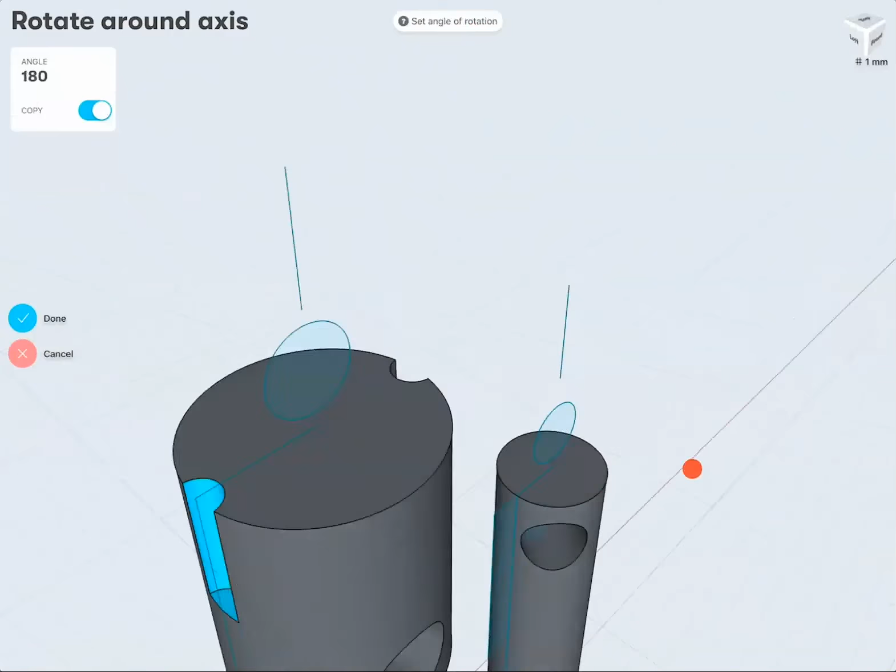I will simply quickly rename this sketch to grip detail, turn back on this side detail. This one I will hide. Then I will go to move or rotate. Then I will select this face and select this face. Okay, next. Select this line, next, turn on copy and type in 180. And you see it actually mirrors over that Boolean result.

How awesome is that? So I don't have to create all these sketches where I want to extrude. I just only need one sketch that extrudes the cut, and then I rotate the cut. We can even do the same again with both cuts. Again, copy, very important. Oh, I forgot the rotation, my mistake, sorry. I realized I clicked the wrong tool, I'm sorry.

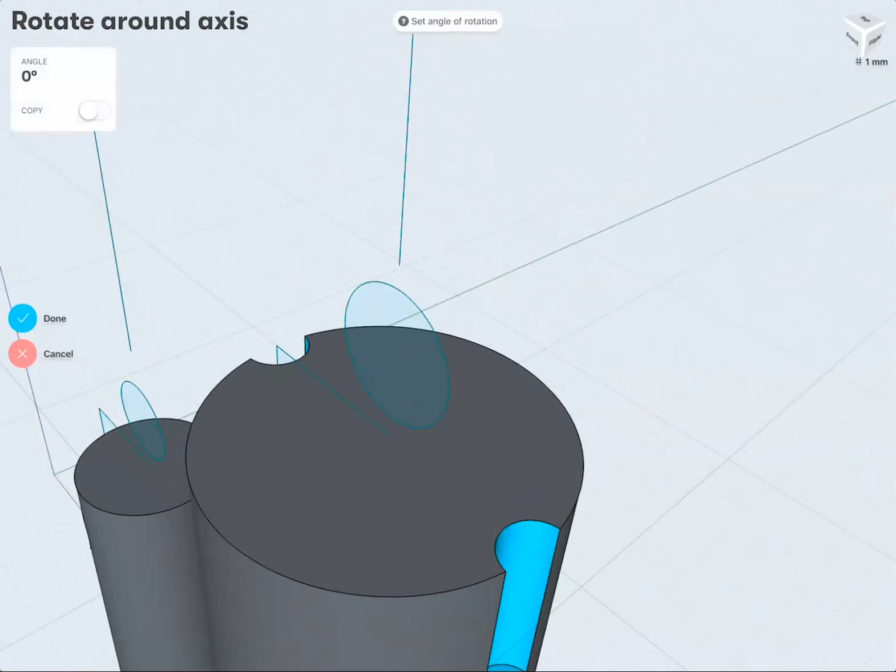So, all 4 faces selected, next. Select the axes, next, and copy, and 90 degrees. We can do this one more time. And then instead of 90, we use 45. You see the first rotation was 180, the second rotation was 90, and the last rotation here, in our case, would be 45. There, perfect. This looks pretty good. It's not too fine, it's not too big.

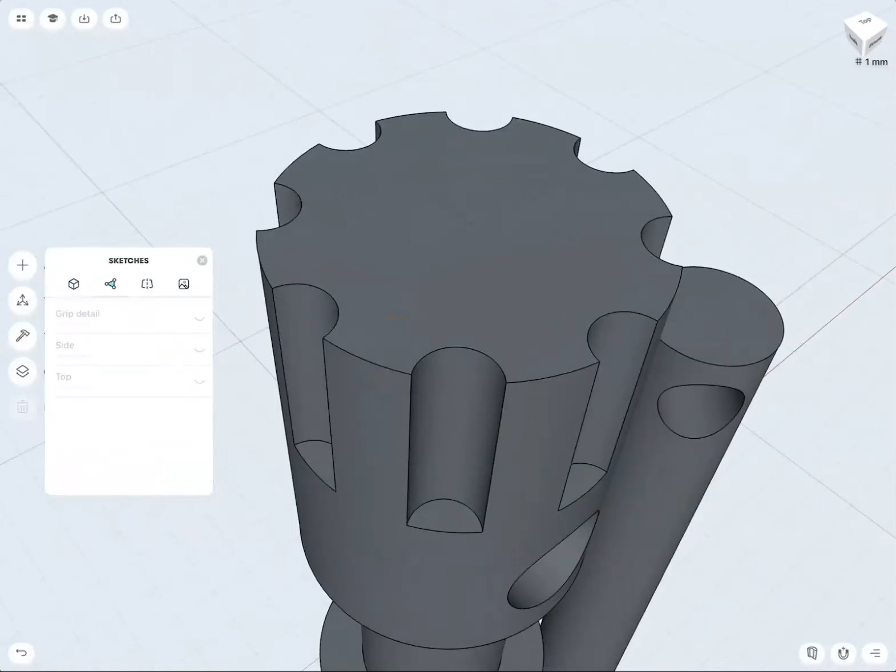Can hide these sketches. And I would like to add a little bit of softness to it. There's one little tip. I will select all these edges here and round them. In my case, 1 millimeter. That's good. And then I can select all these faces. So not individual edges actually, because by selecting these faces, I have already also selected the edges. So nice. And round this one too.

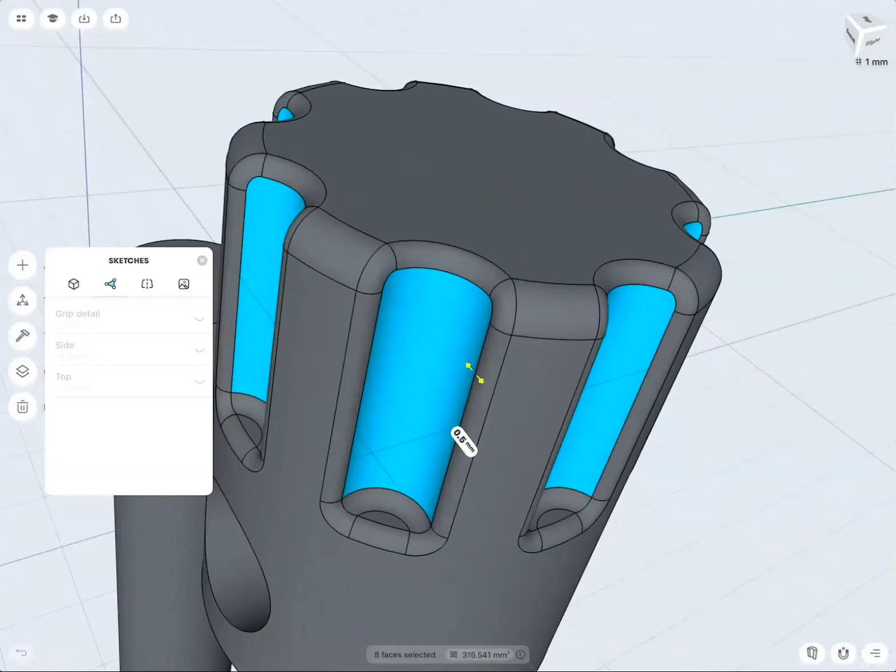Be very careful with the amount of fillet you add to it. I will go with 0.5. Very good. Look at that. This looks really nice and soft, comfortable on your fingers. You don't hurt yourself.

So the last step we have to create is actually the threading. For the threading, I will go back to the front view and turn on my side sketch. And here's a little tip about threading. In real products, you will have threading made out of metal. For 3D printing, we use plastic. So we can't make a threading that is that precise and that strong and fine at the same time. So we have to make threading that's a little bit bigger and simplified.

So I will zoom in a little bit and quickly draw a line. Okay, this is 1 millimeter. So I will create a line from there to there, from there to there, and from there to there. It's a pretty coarse threading, but again, coarse threading also means I have a lot of surfaces and it will be physically more sound, so the threading can't jump.

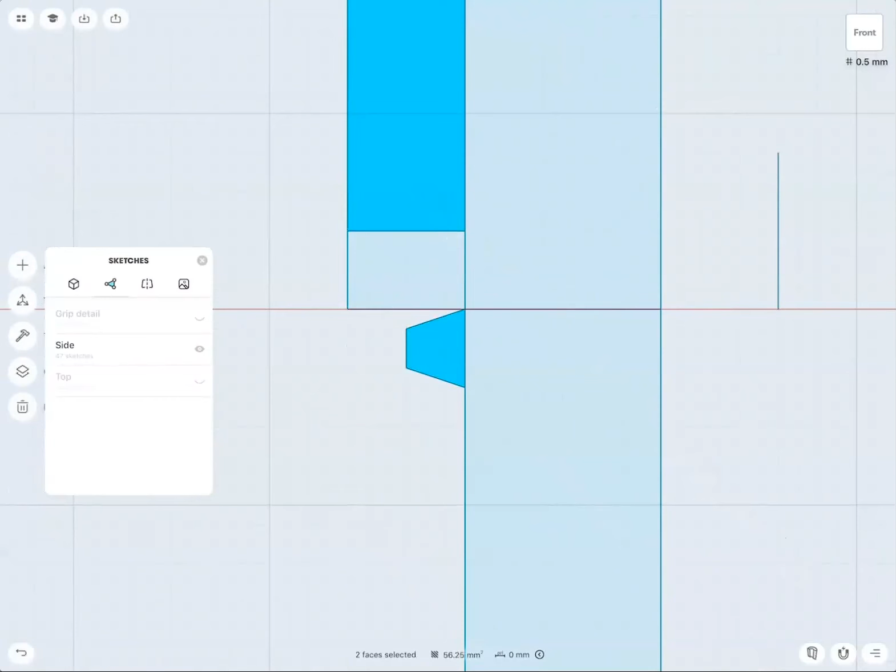And you see this face is half the width actually of the wall where this threading will later cut into. That's also important. So this line cannot be too far to the left, because then on the left side there's not enough material, and that could make the bottom part break. Good. Let's select these 2 points, 2 millimeters. That's good for us to keep in memory.

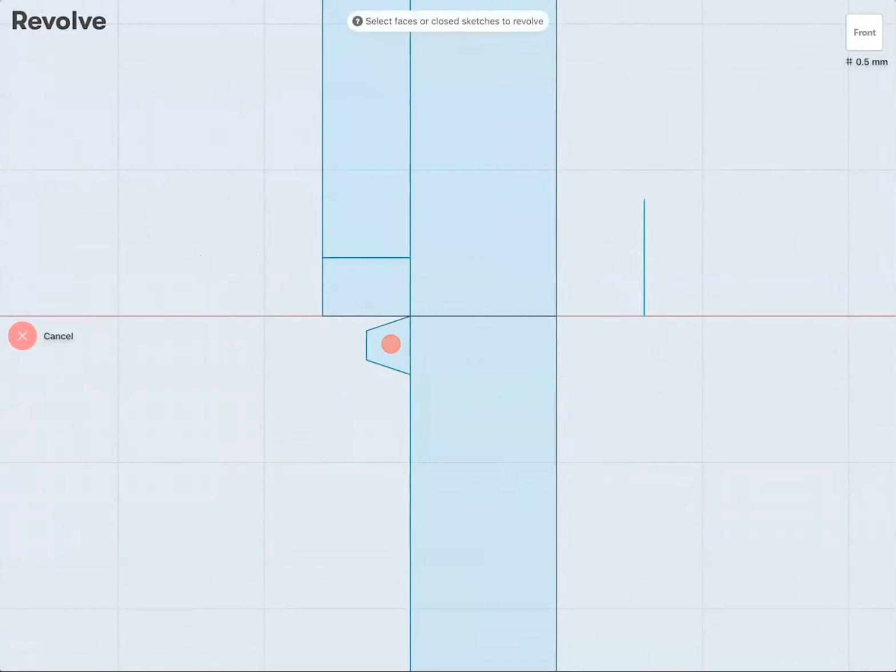Now we have to create the threading. I will first go to groups, make a new one, slide to the left, call this one threading. Let's activate it. Then let's go to tools, revolve, select the face, next, select an axis. And if I type in 6 height and then 720 for a good turn, you can actually see that with 720 and a height of 6, based on the height of the threading itself, I have enough space in between, so things are not too tight.

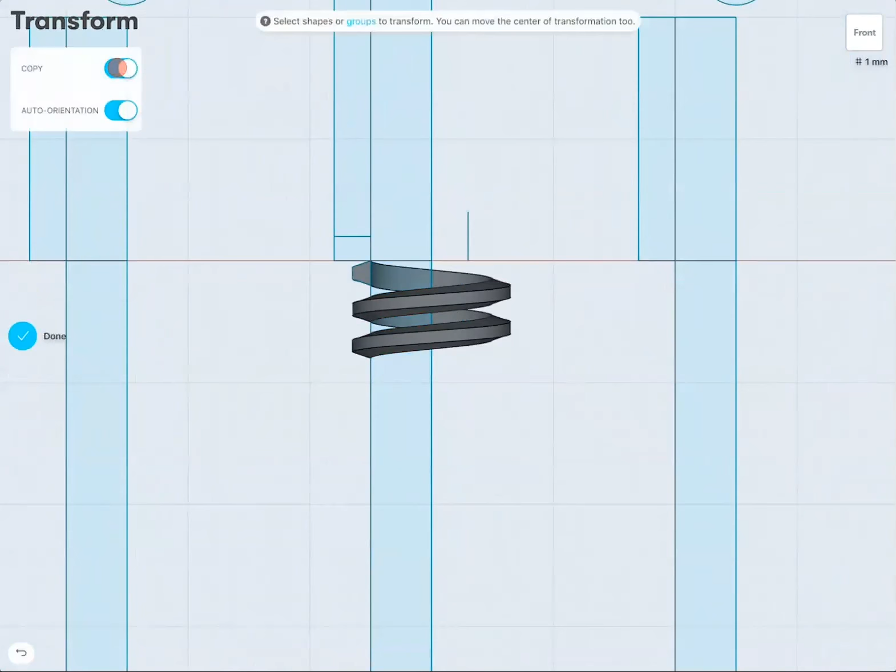Select done. And I would like to, or actually I have to, create more of these threadings down this direction. And this is very easy to do in Shaper. We go to transform, move, turn copy on, and then with the pencil, double tap on a face. And again, because we have the grid turned on, we simply need to move this one down exactly 6 millimeters.

Then I move my screen up and continue moving it down 12. And one more time, this is now 18, 24, and 30, and 36. Good.

Then let's go to Tools, Union, because I have to join all those together. Select done, and I have exactly one threading now. This is perfect. And this threading I will use to add to the axis, which we revolved from these faces, and a copy of that threading I will use to cut out the space out of the bottom part.

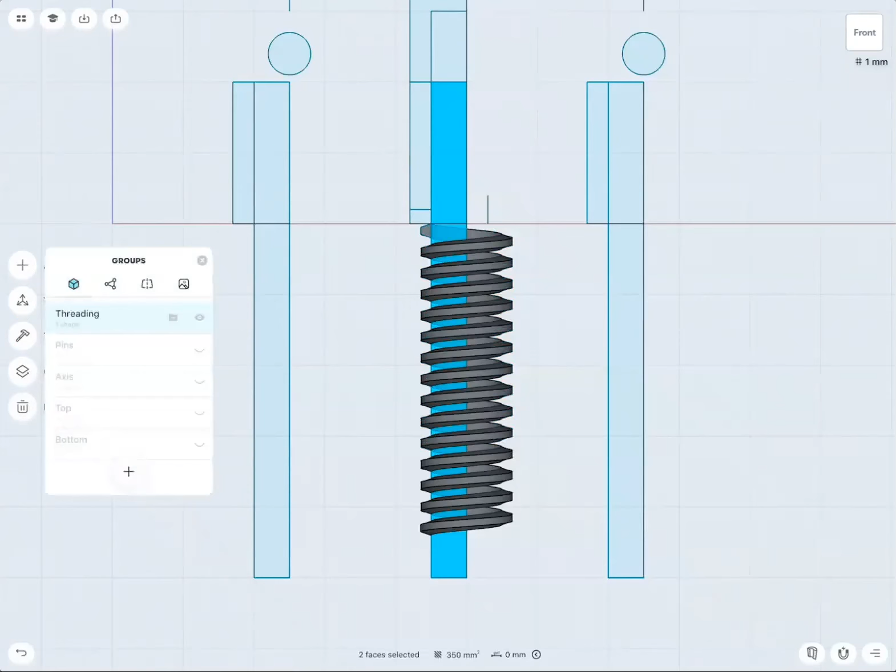So before I continue, I will go to transform, move, double tap, copy, and move this one, let's say 20 millimeters to the right. As I said in my previous webinar, when I move parts, I always try 5 millimeters or 10 or 20. 10, 20 is what I use a lot. It's very easy to memorize, so you don't make mistakes.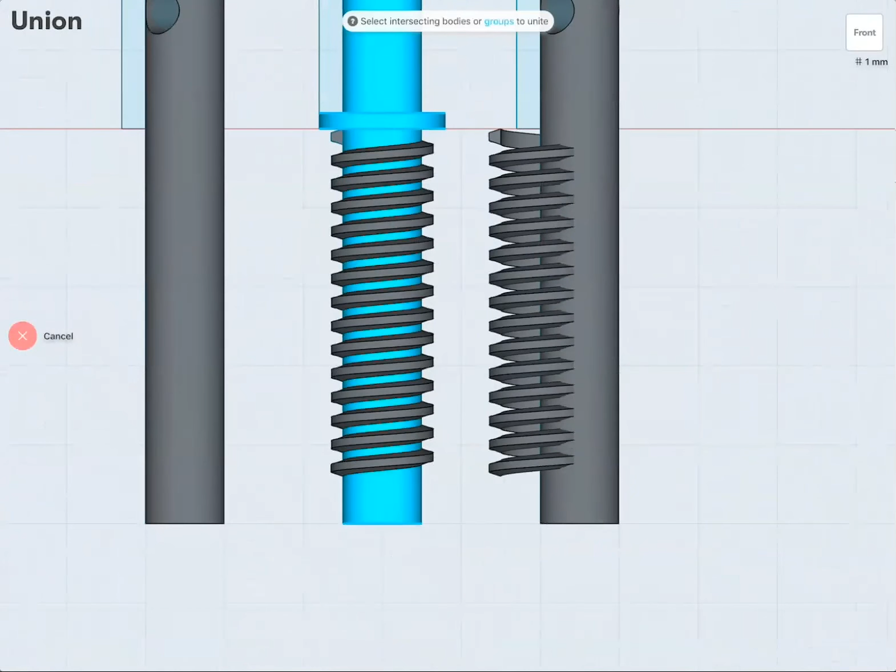Then go to groups, we turn on the axis. We can go to Tools, Union, select the 2 parts we want to join, select done, and there we are. With a finger, rotate the view, because this edge or this face I would like to rotate to make the threading slide in better when it goes into the female part. To do this, go to move and then rotate, select this face, next, select this line, that's our rotation axis, next, and 45 degrees. I have to go negative in this case. And select done. And there we are, perfect.

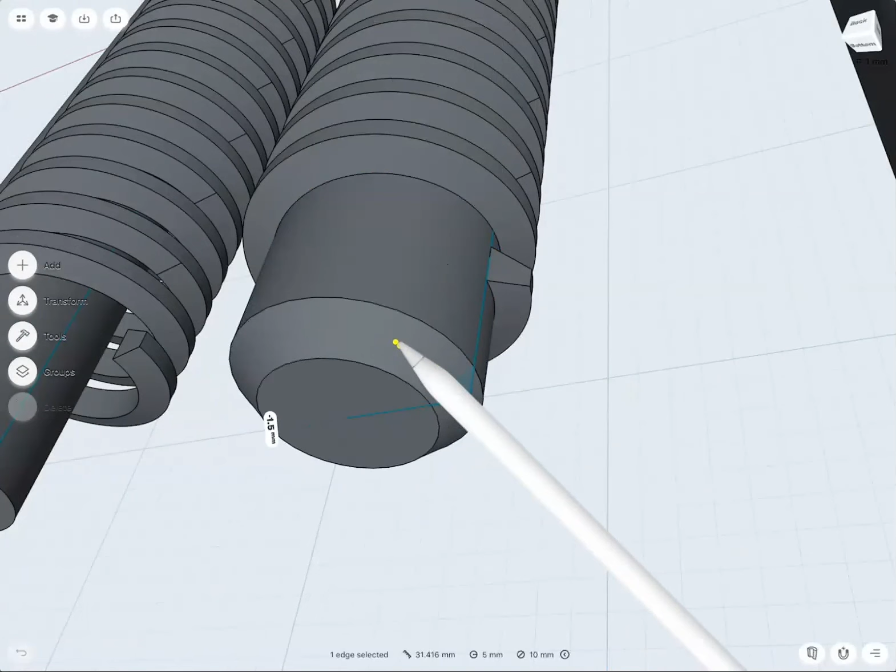And to make this cylinder slide better in, we should select this edge and give it a very basic chamfer. 1.5 or 2 millimeters will be sufficient. Again, based on what 3D printer you print with, how wide your printing nozzle is. You could, for example, print with a 0.25 Ultimaker, or you could print with a 1.2 millimeter wide nozzle with the TAZ 6 MOARstruder.

You have to be very mindful of how you round edges so that the dimensions you create, the printer can also print. So the MOARstruder with a 1.2 millimeter wide strip would not be ideal for this, but the 0.25 or even, let's say, a 1 millimeter nozzle would actually be pretty good. However, as always, the smaller the nozzle, the thinner the layer, the better the result, but the longer it also takes.

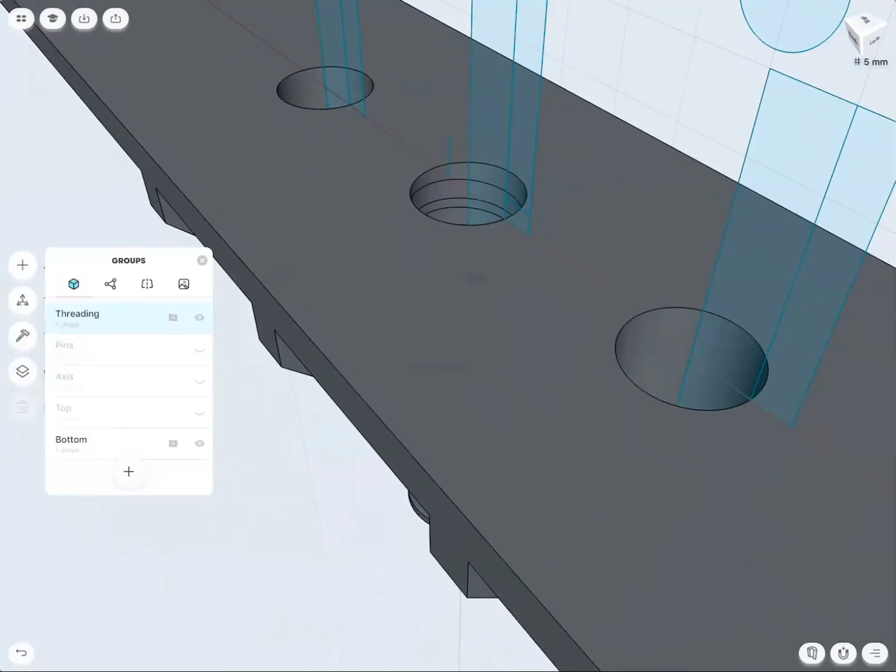Good. With this done, I would like to move my axis back into the axis group. This I will move over to where it was before, 20 millimeters. Then I will go to the bottom part. And I could cut this one out, but there are two things I should change first. Number one, this threading, as you can see, does not completely come through. There actually it stops. So the threading is 6 millimeters high. So I should move the whole object 6 millimeters up. It's just a very easy way to do that.

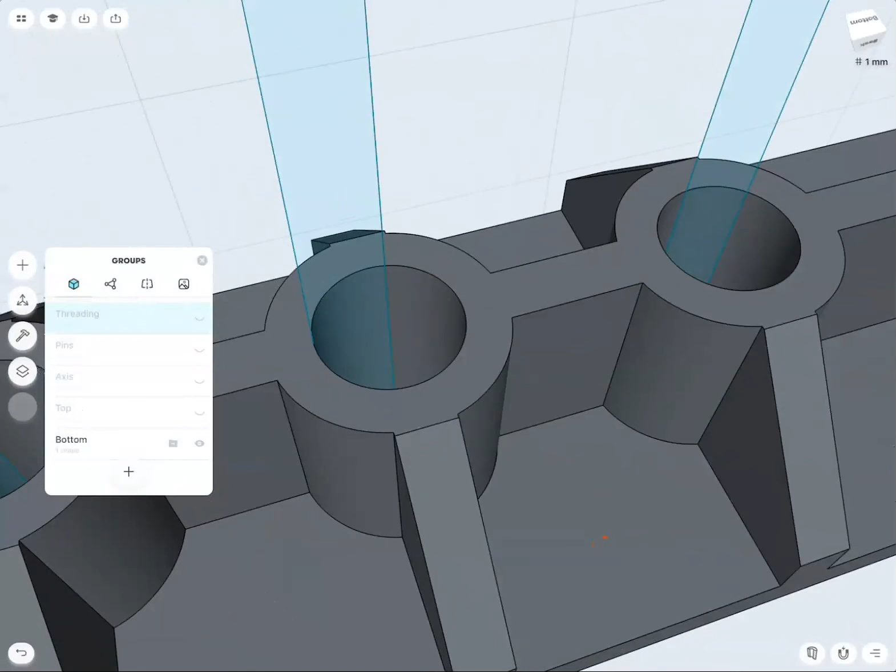And where the threading starts cutting into it, so this top face and this top face, I should chamfer these edges too. So cutting the threading and then later screwing the axis through it will be easier. It's kind of like a pilot opening. Here I will open this by 1.5 millimeters and I will do the same here. 1.5. Very good.

To make things perfect and even, I will do the same here, so that later the left and right axes have it easier to slide through. Because you never know if there's a little bit of inaccuracy when you 3D print parts. With all this done, let me quickly go to these ends and add the chamfer there too. Very good. I think I used 2 on the left side, so let's make this even. Good. Very good.

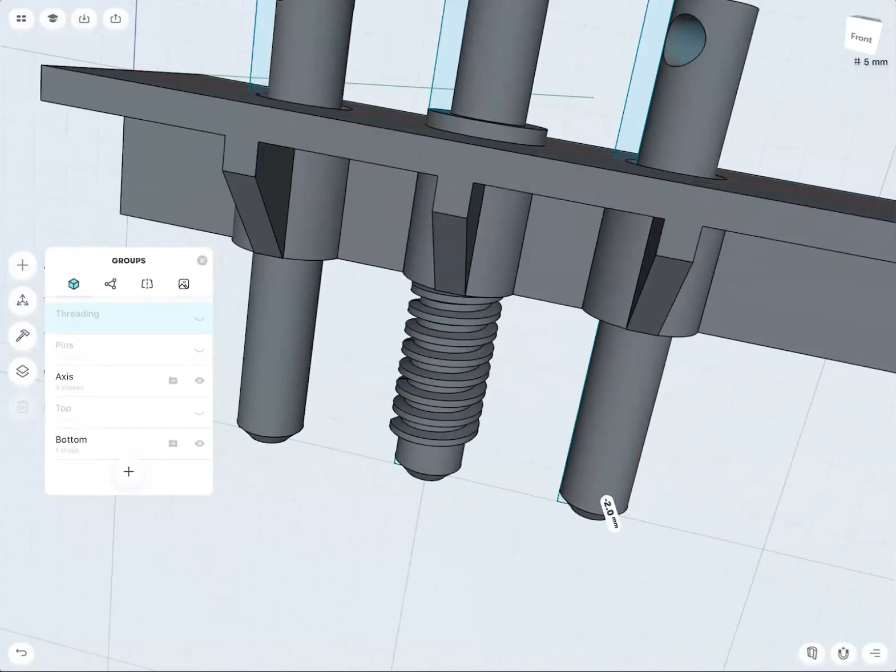So let's show the threading, and we're ready to go to subtract this body minus this one. And there you can see now, even the threading cuts a little bit through these chamfered faces I created and makes everything a little bit easier to slide in.

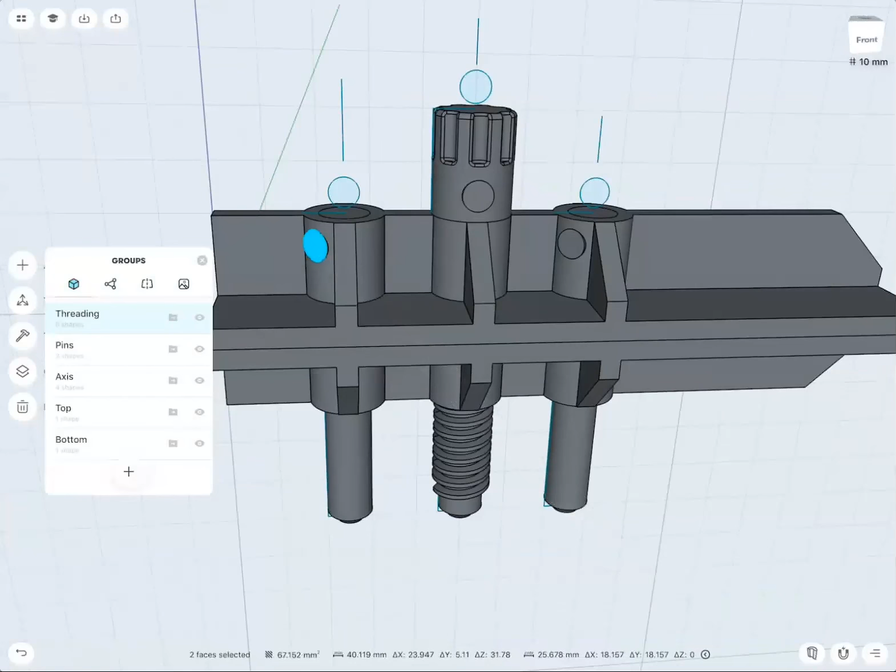At this point, let's have a peek at what we achieved. We have basically the top part, the bottom part, we have the left and right support cylinders, we have the center threading and a grip on top, and we created some very basic mechanical locks to keep everything in place.

And at this point, now it's up to you if you want to continue refining the design, rounding some more edges. Do we maybe want to have a little bit of structure, like some teeth or something below there? Do you maybe want to cut a small groove out from here?

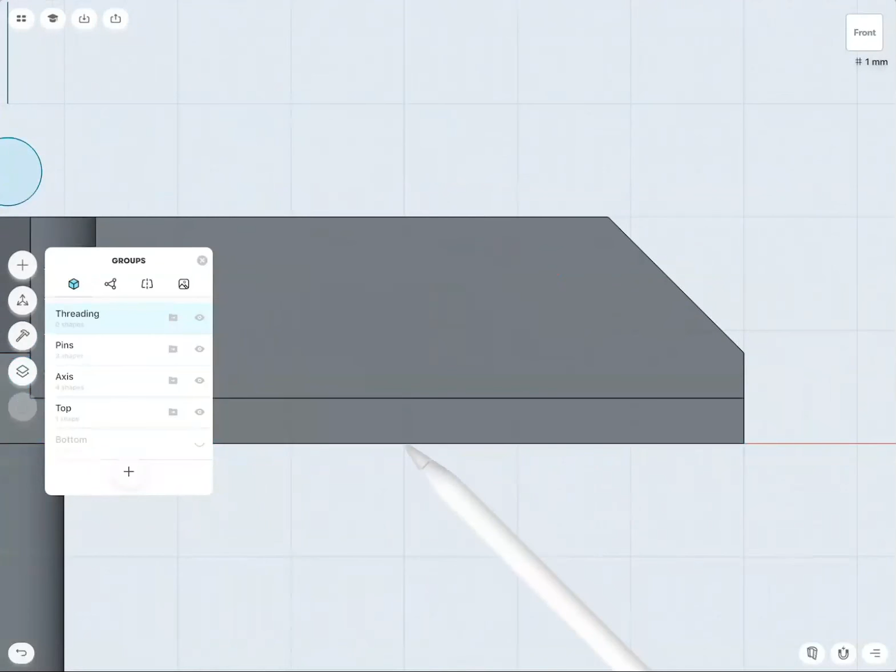So let's say I create a line there to there, and this I cut completely through, because now this allows me to glue in a soft material, felt, leather, so that when I clamp something that's bendable or can be pressed into, I have a soft material as a buffer in between. And I also have this top part here to make sure that this area does not bend too much. So these are now steps which you can continue modifying and customizing this design so it fits your needs.

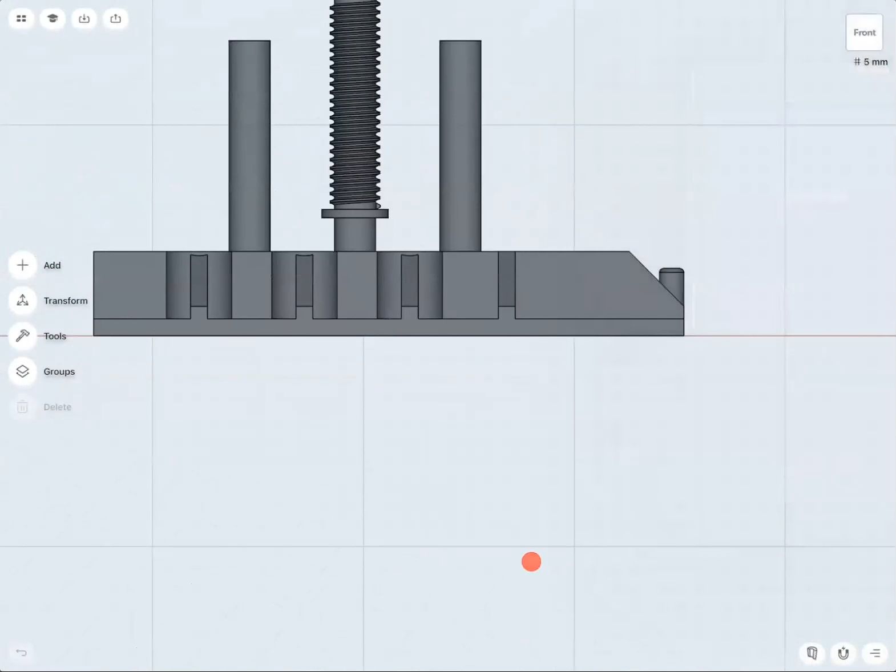So let's talk about the last part, how we can bring everything over to a 3D printer. Let me go back to a prepped file and give you some tips on how I will reposition everything in Shapr3D. When I bring it over to the 3D printing software, you see I neatly positioned everything on the same level or height, and I rotated all these axes and the grip, etc., so that the openings face one direction.

And all these pins are nicely put next to each other, so that when I send this to the 3D printer, you have to keep in mind the 3D printer prints in particular ways, and the more order you can bring into it, rotating parts being nicely vertical, the better your print result will be, because you also have to create support material, etc.

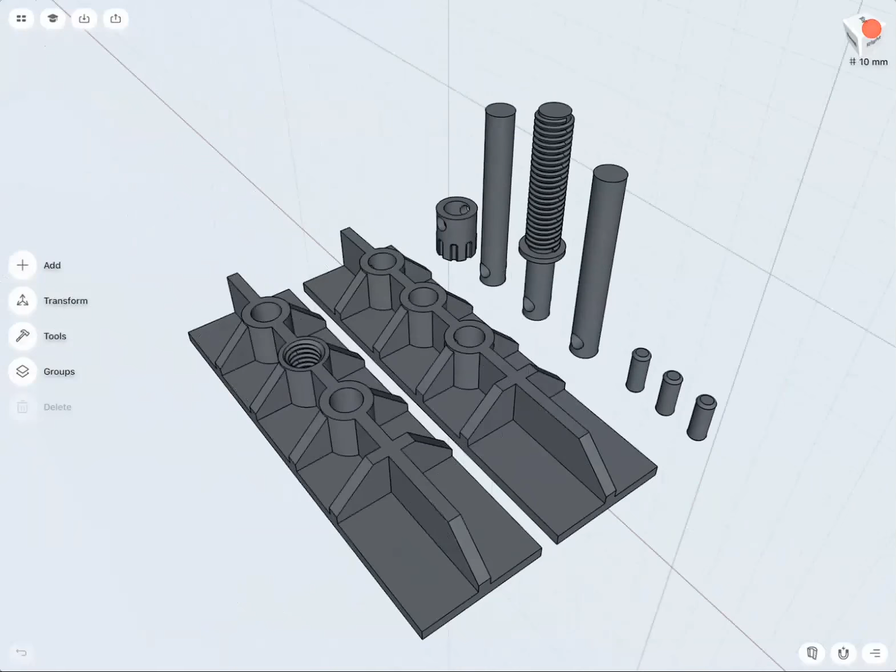So this is kind of like step one, making copies of your parts. Here in my design, you see I have individual groups, and I have another group where I have all the 3D parts in it, because there's a really nice function in Shapr3D when you want to bring all the stuff over. I will turn this group off for the moment. And you see here I have individual groups, one for the grip, for the clamp parts, for the threading, because that's the most complicated part, the other axes, the pins.

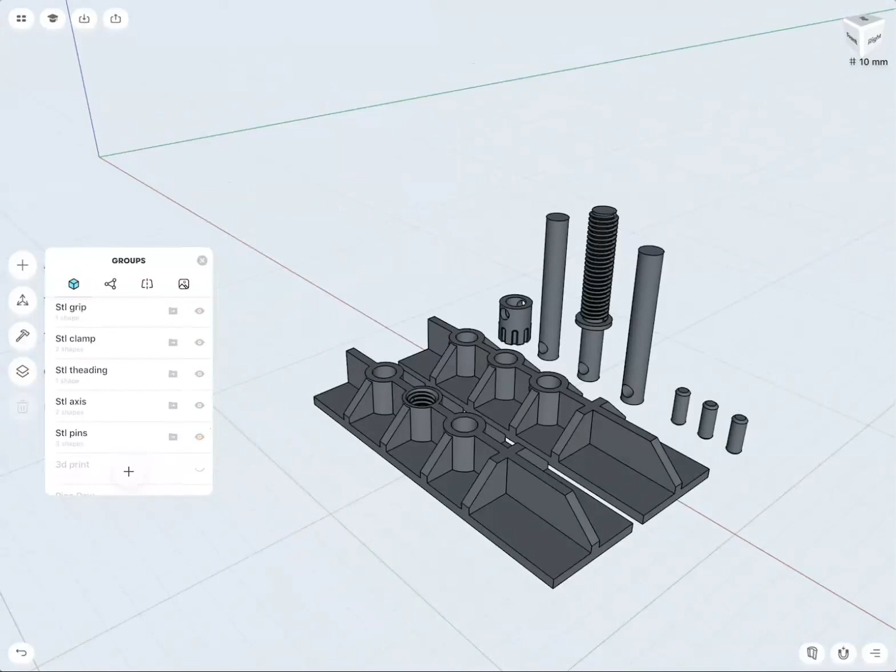And to export it now, we can select the export icon, upper left corner, select 3D print. We can give it a name. And then we can turn on and off include hidden objects or groups, so everything you don't see is not being exported, which is really nice. We have a resolution slider. Based on how good or fine your printer is, you can make the resolution higher. If you go low, print or round surfaces might not be very good.

Particularly, I find medium and high is very good when you want to work with rounded parts. To be honest, majority-wise, I just work with medium, it always seems to be very sufficient. And the glorious function is save each group in a separate file. So if you do this, Shapr3D will create a zip file, and inside the zip file you have the individual groups saved as one STL file. If this is turned off, you will get everything you see as one STL file.

Then we can select share, have a name, and we can email it to you. I work on a Mac at home, so I can select save to files, and then select the cloud service of your choice. In my case, I will use iCloud Drive, and I have a folder created, webinar, and then click add. And then Shapr3D will create the STL mesh of all this and send you a file to there.

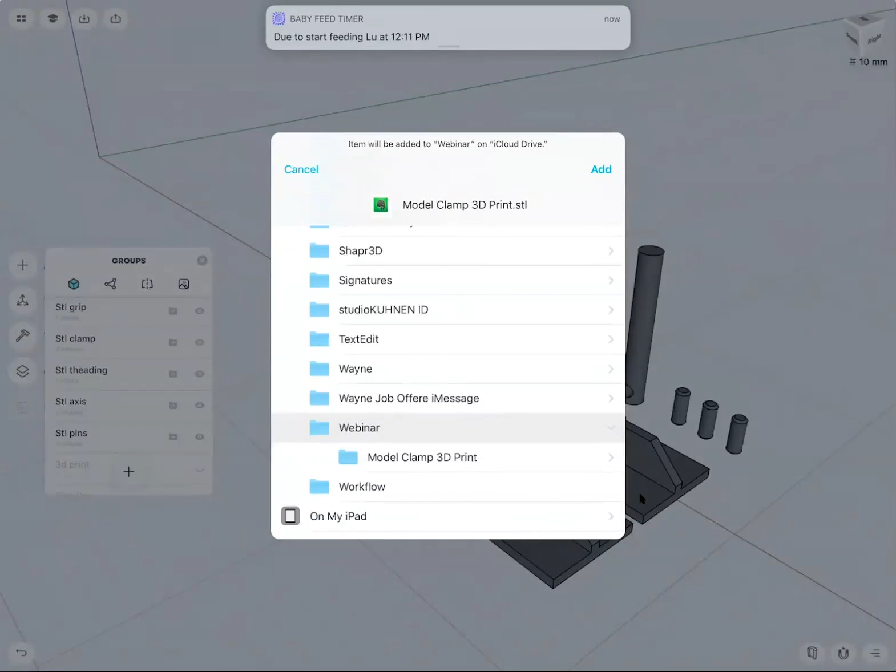So let me switch to the Cura software. Or for a moment, I will go to the Finder. There you see there is one file with all these parts inside. Here is the zip file, and inside the zip file are the individual elements. And nicely, you see all these STLs are also named by how the groups are named. Again, that's very important, also why you should always name your groups logically. So here for 3D printing, I know exactly what is in what STL file.

And then let's go to Cura. Here, for example, I just loaded the STL file that has all the elements in one part. There are two philosophies: you print everything at once, layer by layer, or you print one piece after the next piece. If you ask me, it's based on how flawless your printer works.

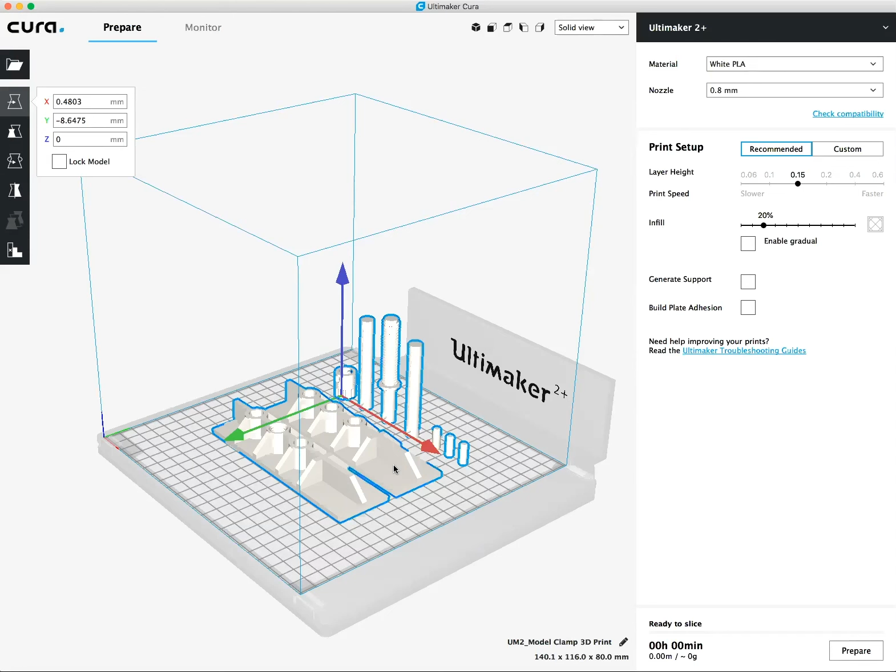The problem is if you print everything at once, if there's one mistake, it can happen that maybe all your parts are half printed, so you have to restart, which is sometimes simply safer to print one part after the next. It requires, unfortunately, that if one print is done after 2 hours, then you have to go to the machine, load the next file, and start printing. The advantage of neatly positioning all these parts on the space is you hit print and you can walk away and come back when everything is done.

And that, in a nutshell, is how I created this model making clamp, and then created also all the different STL files for it, everything inside Shapr3D.